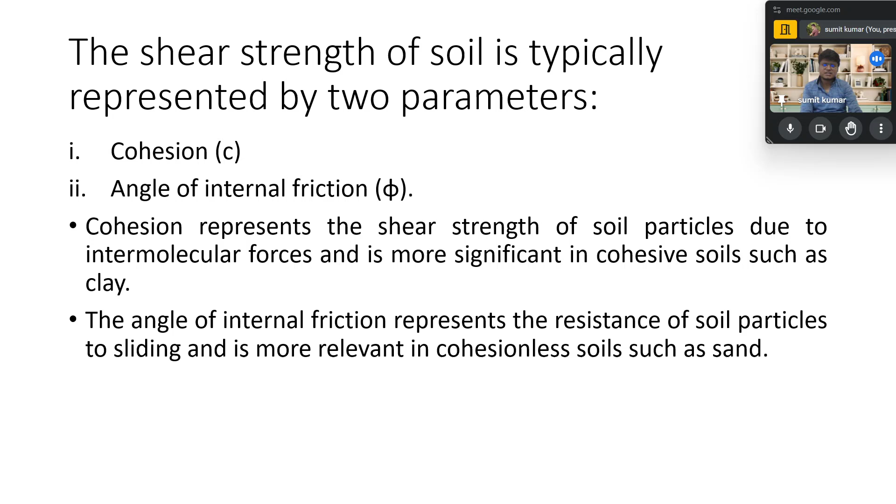First we understood the definition of shear strength, what it means to us. Afterward we learned about the factors that contribute to shear strength, that is cohesion and angle of internal friction. Then we learned about the types of tests: direct shear test and triaxial test. In the direct shear test, we studied the failure mechanism, and we understood the importance of shear strength in geotechnical engineering. In addition, we understood how shear strength is helpful for us in granular soil and cohesive soil, in one way or the other, and what we mean by that.

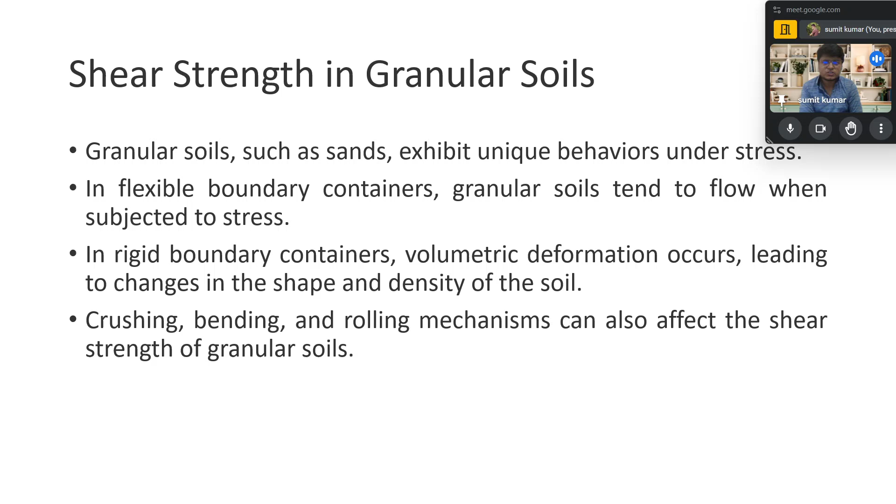That is how cohesion provides shear strength, and how the granules and the angle of internal friction help in contributing to strength, as understood in our last sessions. So these are the two slides. After that, we understood shear failures, in which we came to understand the state of stresses like sigma and tau.

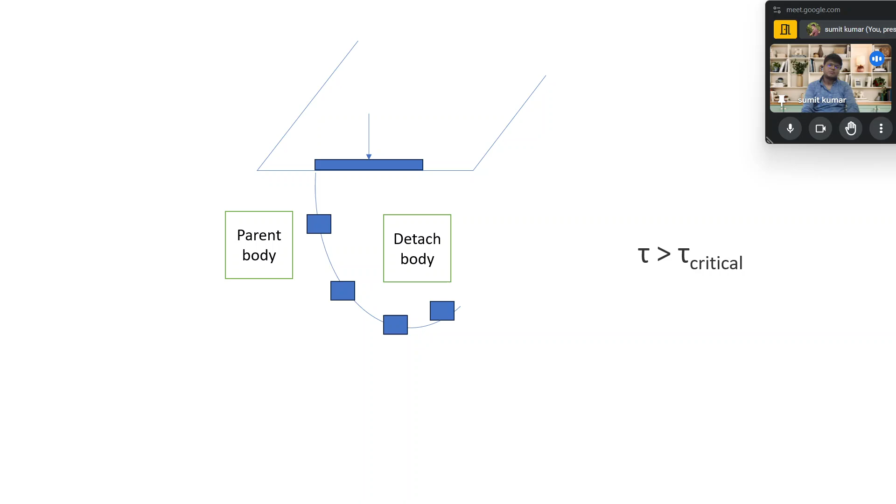Afterwards, we came to understand the parent body and detached body concepts, in which we also saw that after applying a certain amount of force or load, the failure planes get achieved, and the detached body, which was in concentration with the parent body, gets detached out. So the critical concept is also understood by us, and a physical example is also shown.

I am just taking a quick revision so that those concepts will be revised in your mind, what we have gone across during the previous classes. So from here when I put the new things, the revision will be there. This revision needs to be done by you as well before coming to class, but just as a small revision session, in 5 minutes I will try to show you all the slides so that those things will be revised in your mind. So we will go ahead.

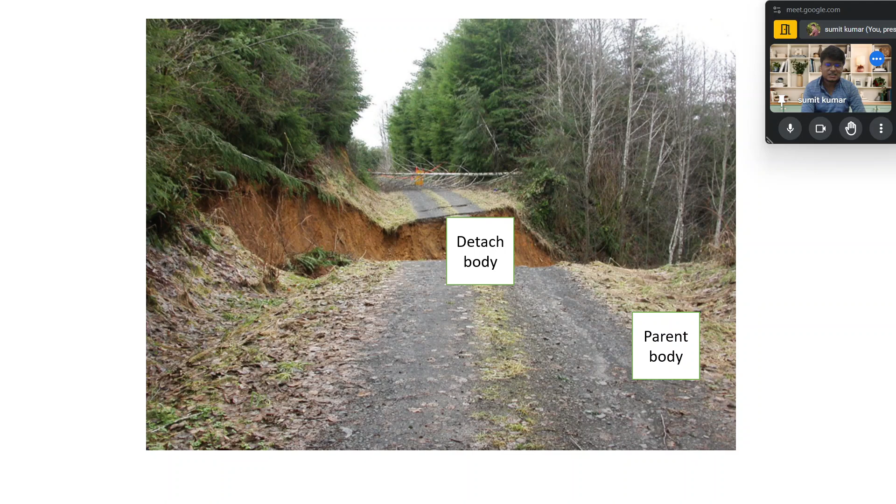So these things you have understood, the detached body and parent body concept, and how, if the strength of the critical failure surface is suppose 100 units, the load applied up to 99 units is totally acceptable, but when the load applied is 100 units, it is on the verge of failure, and when the load is 100.1 units, the surface flows out. So that concept we have discussed, and you must have understood those things.

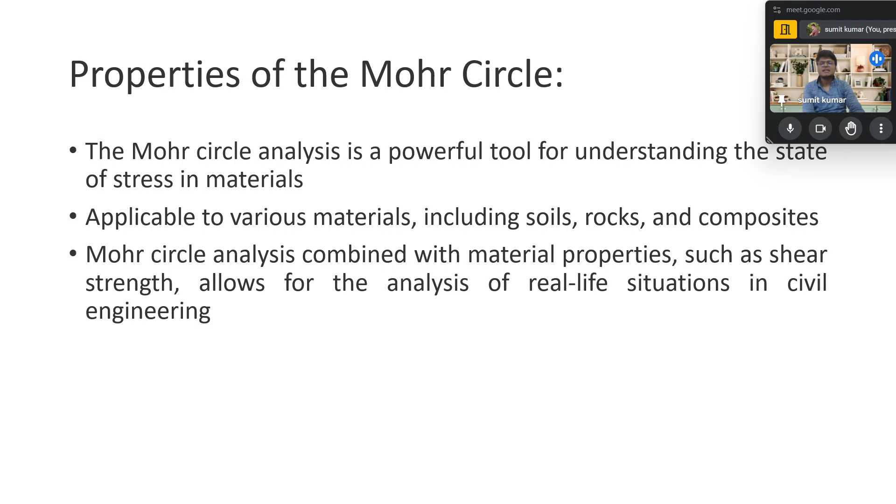We understand the biaxial state of stress. We understand that we are doing it in two dimensions, sigma x and sigma z, and how we found the shear stress and normal stress, the different normal axis and shear axis, and the principal shear stress and principal shear strain. In the Mohr circle, we found the properties of the Mohr circle, sign convention about the Mohr circle, and how we can find the origin, radius, and principal shear stress and principal shear strength.

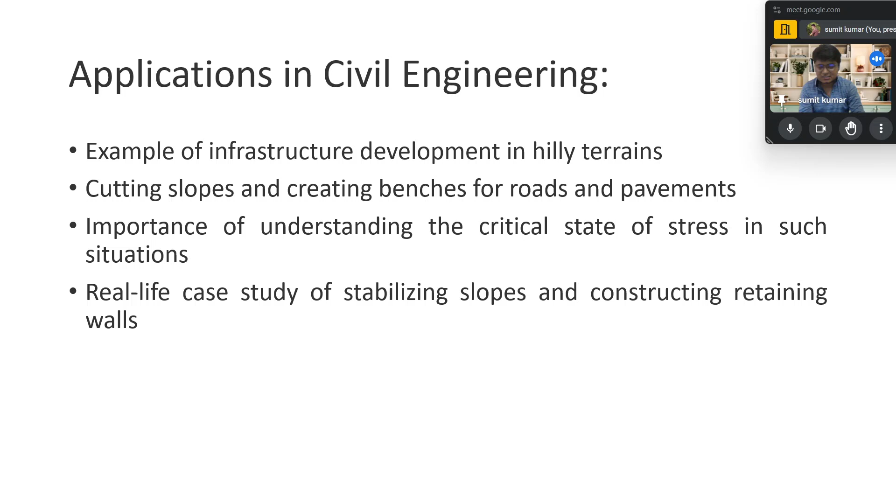We also saw some problems during the first class. After that, its application in civil engineering was covered during those sessions, and how it is practically implemented in the field. Apart from that, some more problems were taken up, and we were able to find that at a specific angle, what will be the maximum principal stress and maximum principal strain. So those things we have covered during our previous sessions.

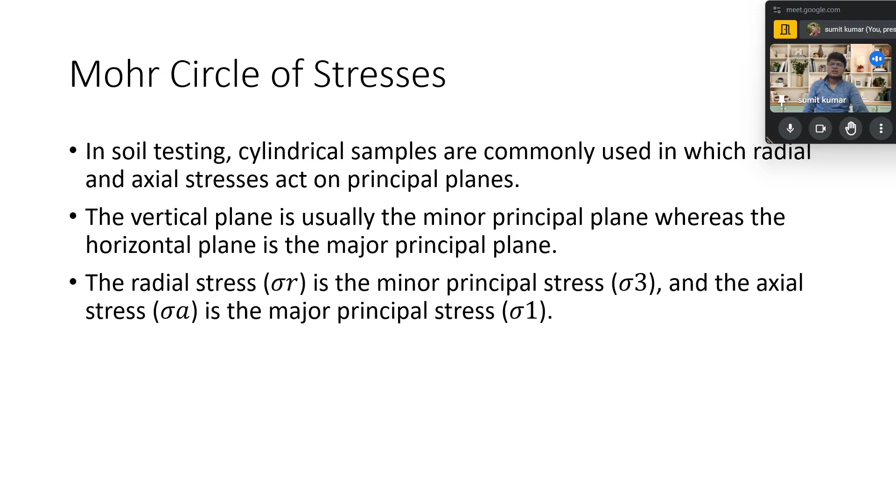Apart from that, we have understood the Mohr-Coulomb failure criteria. So from here we will move ahead and cover the new content from here, going one by one in today's session. Now I will start with the new things, because whatever I wanted to show you is already covered. Now we will start with the new content that will be more helpful for you.

So I will also take a pen. In today's class, first of all, we will start with exploring triaxial testing in geotechnical engineering. As seen earlier, we discussed the direct shear test, vane shear test, and triaxial test, but we will now go more in detail. We just said that there are three types of triaxial tests: UU test, CU test, CD test. We have come across those things, but we will now discuss in detail: unconsolidated undrained test, consolidated drained test, consolidated undrained test, that is UU/CU/CD.

So we will go ahead with that in today's session, and you will get a better understanding of the things. So first of all, we start with the definition again, because the basics should always be there before we move ahead. First of all, we talk about the definition. What does shear strength mean to us? We define shear strength as a material's response when subjected to shear motion.

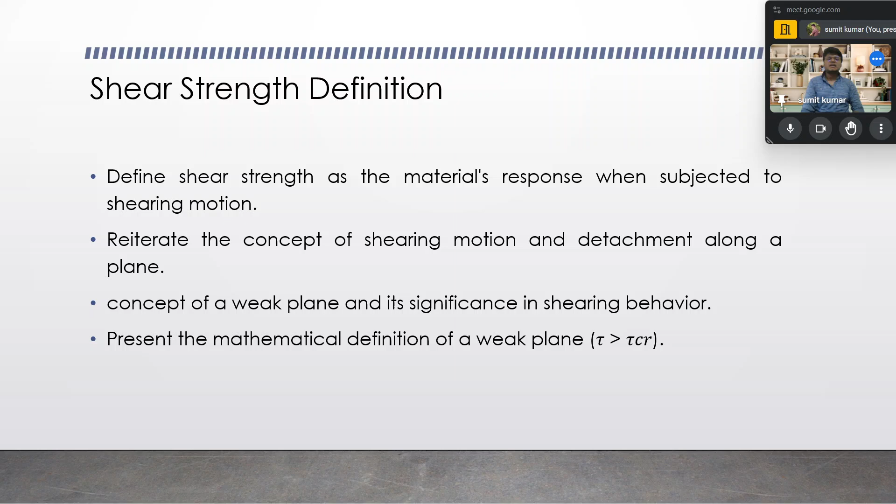So that problem is when we talk about the critical. Critical means that plane which is the weakest plane in our soil section. So from where the failure takes place, that section is the weakest plane, and the stress at which that failure takes place is the critical stress.

Okay, now we talk about the factors which influence the theory. One of the major factors is the earthquake. An earthquake can lead to relative motion between the soil particles. During seismic tremors, the soil particles come into movement with respect to one another, so motion takes place between the soil particles or the soil layers. If a stratified soil layer is there, a different type of movement could be there.

And in general, depending on the condition of water and soil type, if it is sandy soil, sometimes liquefaction can take place during the seismic tremor. So the readjustment and movement of soil particles between each other could lead to relative movement and to the failure of soil from that section.

Another is the fault. The fault can cause one portion of ground to slip down, leading to shearing. In soil sections there are several faults, and the movement could be up and down. If you have gone through a course in geotechnical earthquake engineering or soil dynamics, you will come across how the failure takes place, how subsidence takes place between the plates, and how the parts move over one another.

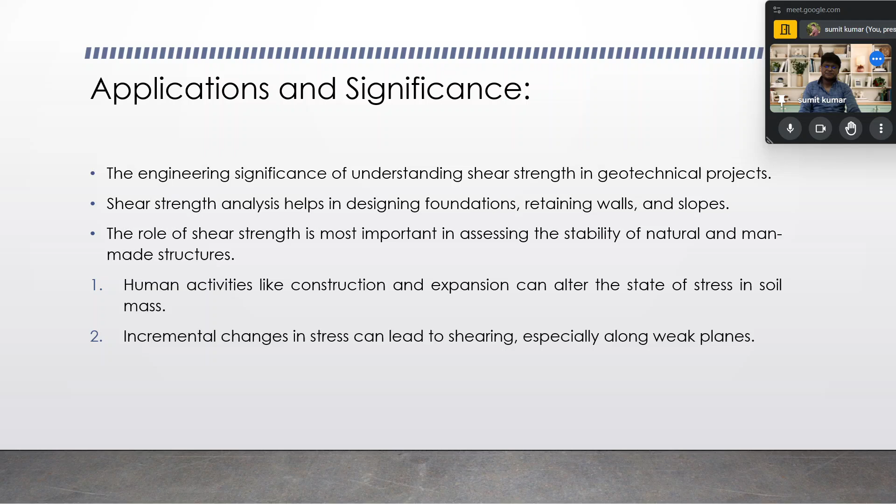Now, when we say that the incremental changes in stress can lead to shearing, especially along the weak planes, yes, obviously. During our last slides' discussion, we came across this fact and we said that this failure could be developed. Okay, now we talk about the Mohr-Coulomb failure criteria. What is the Mohr-Coulomb failure criteria?

When the soil has failed, the shear stress on the failure plane defines the shear strength of the soil. Thus, it is necessary to identify the failure plane, that is the plane on which the maximum shear stress acts, or the plane where the ratio of shear stress to normal stress is maximum, because by which we are able to find the critical plane of failure.

At present it can be assumed that the failure plane exists and it is possible to apply the principal stresses and measure them in the laboratory by conducting the triaxial test. Because as I have discussed earlier, in the triaxial test we are able to achieve the practical situation in the field, so that condition is justified.

Okay. Now, some more points in the Mohr-Coulomb failure criteria: the Mohr circle of stress at failure for the sample can be drawn using the known values of principal stress, and if the data from several tests carried out on different samples up to failure is available, a series of Mohr circles can be plotted. As we have seen, when we draw the series of Mohr circles and draw a common tangent, we find the failure envelope as well.

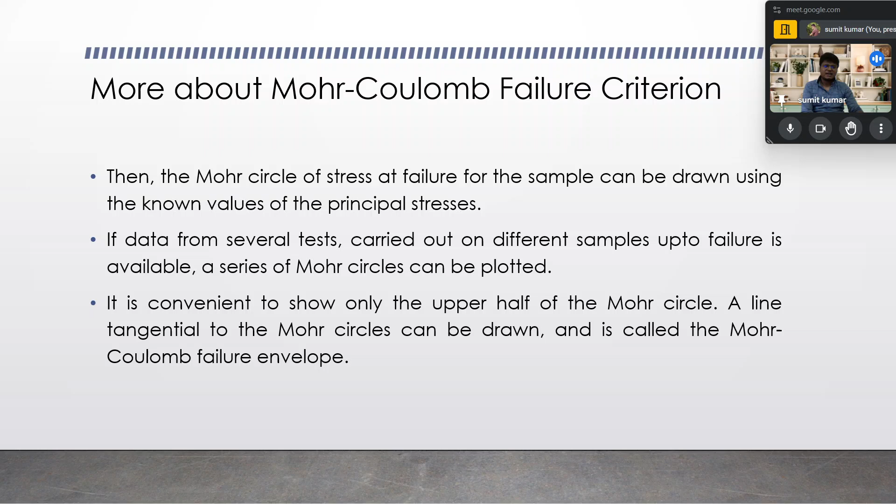Okay, so as we have discussed, we will draw the Mohr circle at different states of stress. First of all we keep changing sigma 3, and for that sigma 1 will be found. Then for the second Mohr circle, we change sigma 3, and the value of sigma 1 also gets altered. At the third stage, we again change sigma 3 and again get the value of sigma 1.

And one more point can be captured from here: the intercept on the y-axis, that is the tau axis, is the cohesion, and the angle with the horizontal axis, that is the sigma axis, is the angle of internal friction, which we are able to find by drawing the Mohr-Coulomb failure envelope. Okay, I think over here there will be no doubt.

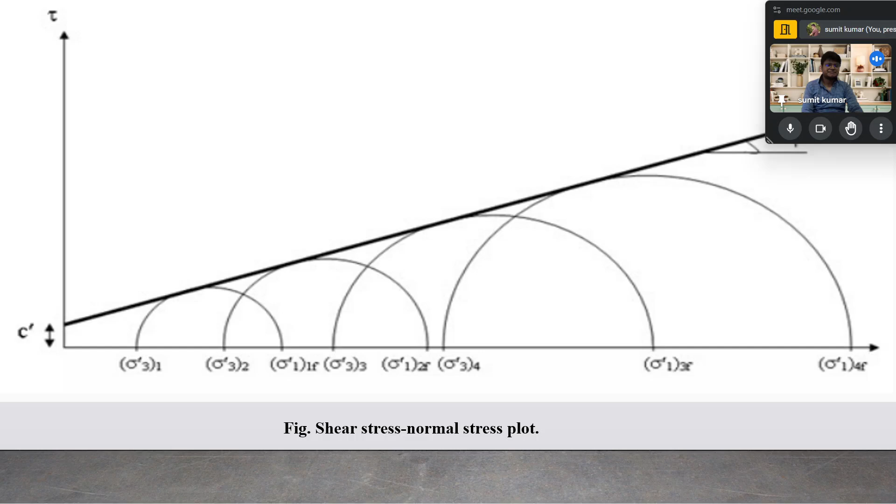Hello. Yes. Okay. So now we will talk about some more points in the Mohr-Coulomb failure criteria: if the stress condition of any other soil sample is represented by a Mohr circle that lies below the failure envelope, every plane within the sample experiences a shear stress which is smaller than the shear strength of the sample. Thus, the point of tangency of the envelope to the Mohr circle at failure gives a clue to the determination of the inclination of the failure plane.

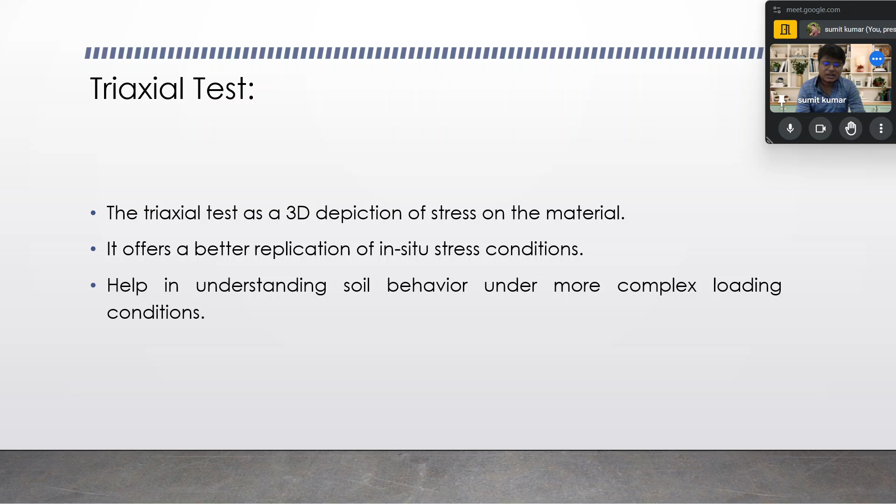And we will see in the triaxial test how these things are actually implemented. So when we talk about the triaxial test, we say it is a 3D replication of the stress of the material, as we have said many times. It replicates the practical 3D situation in the field to the laboratory. It offers better replication of in situ stress conditions and helps in understanding the soil behavior under more complex loading conditions. And how it takes place, we will see.

So, a triaxial test is carried out in a cell on a cylindrical soil sample having a length to diameter ratio of 2. What do we mean by that? Length is 2 times the diameter. The usual sizes are 76 mm by 38 mm. Here 76 mm is the length and 38 mm is the diameter, so the length is 2 times the diameter, and the other is 100 mm by 50 mm. It also satisfies the L by D equal to 2 criteria.

Okay, now three principal stresses are applied on the soil sample, out of which two are applied by the water pressure inside the confining cell and are equal. We have discussed this point as well, which is not written earlier, but I have stated many times. Suppose this is a cylindrical sample. You can see. On this cylindrical sample, when the state of stress is applied, it's applied from all directions equally.

So when the state of stress is applied equally, if you consider the x direction and z direction, in the x and z direction the stresses are applied through the water in the confining cell, that is the confining pressure, and that will be equal. And the stress in the normal direction is of a different value, that is said to be the deviator stress, which we will come across. Okay, not to worry.

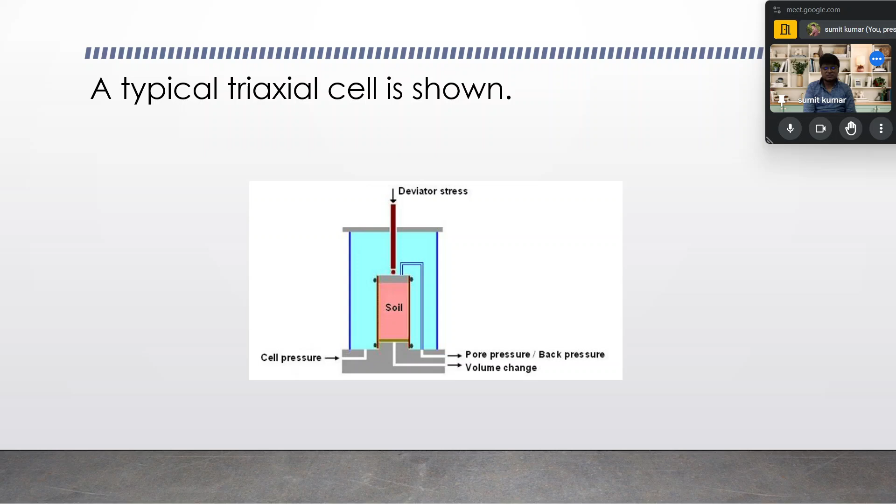Over here, you can see that the deviator stress is applied from the upper section, the water is filled in the cell, and that applies the confining stress, that is sigma 3. And you can see the cell pressure, pore water pressure, back pressure, the volume change, everything could be measured. So, how this test is performed and what results we come across, we will see. Okay, so first of all, the test procedure.

Okay, so give me a minute. I will take some water. Okay,

Okay, no problem. So we are talking about the test procedure. First of all, a soil sample is placed inside a rubber sheath which is sealed to a top cap and bottom pedestal by rubber O-rings. For tests with pore pressure measurement, porous discs are placed at the bottom and sometimes at the top of the specimen. And why these porous discs? We have discussed earlier as well. We will come across it.

A filter paper drain may be provided around the outside of the specimen in order to speed up the consolidation process, and the pore pressure generated inside the specimen during the test can be measured by means of a pressure transducer. So, triaxial testing is a fundamental and powerful technique in geotechnical engineering. Why fundamental and how powerful, we will see.

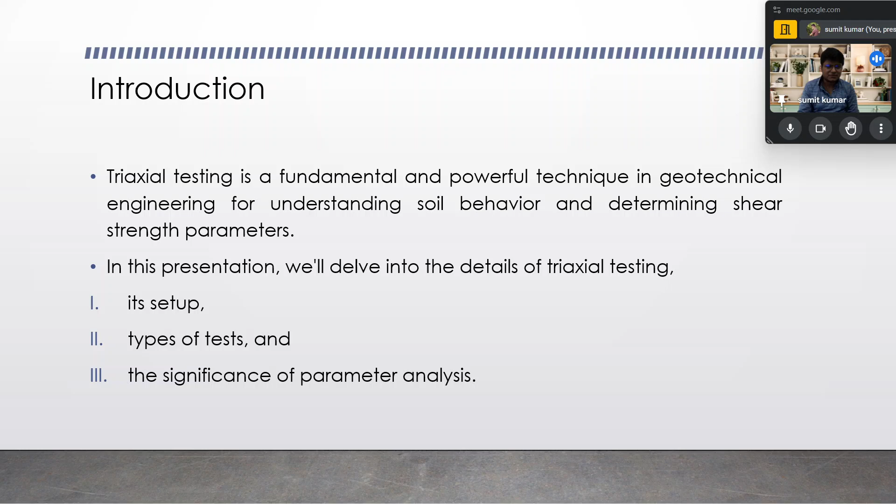It will help in understanding the soil behavior and determining the shear strength parameters. So during this presentation, we will see the details of triaxial testing, that is its setup, the types of test, that is the UU test, CU test, and CD test, the parameters we are able to obtain, that is c and phi, and how we develop the relation sigma 1 equals sigma 3 tan squared (45 plus phi by 2) plus 2c tan (45 plus phi by 2).

So here you can see that the triaxial compression test consists of two stages. The first stage is the consolidation stage. In this, a soil sample is set in a triaxial cell and a confining pressure is applied. In the second stage, the additional axial stress, also called the deviator stress, that is sigma 1 minus sigma 3, is applied, which induces shear stress in the sample. The axial stress is continuously increased until the sample fails.

You have seen the Coulomb failure curve, and you have also seen sigma 1 and sigma 3 plotted. So sigma 3 is applied, after that the deviator stress is applied in the upward direction until failure takes place. At failure, the value of sigma d is found, and sigma d is sigma 1 minus sigma 3, so we are able to find sigma 1, and on that basis we draw the Mohr circle. In the next setup we increase sigma 3 to sigma 3 2, and again apply the deviator stress.

In that case also we are able to find the deviator stress at which the soil fails, and we find sigma d2, where sigma 1 2 minus sigma 3 2 is sigma d2. So we are able to find sigma 1 2 and sigma 3 2. Again in the third case we repeat the same procedure, and we obtain three or four Mohr circles. Then we draw a common tangent and form the Mohr-Coulomb failure envelope.

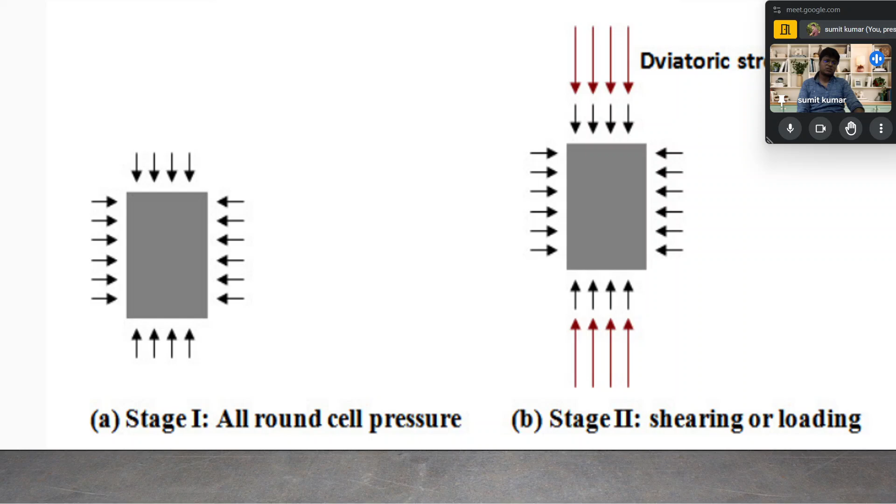Okay, now when we talk about understanding the triaxial test, the purpose is to evaluate the shear strength parameters of the soil sample. The purpose is only that, that we are able to evaluate the shear strength parameters. And what are the shear strength parameters? Shear strength parameters are the cohesion and angle of internal friction.

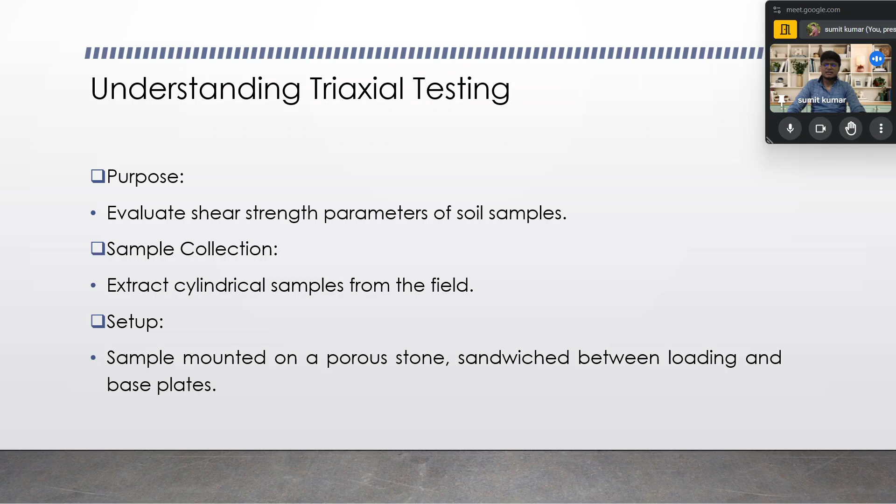Okay, so the sample collection. Extract cylindrical samples from the field will be collected, filled in the membrane and then kept in the setup which has been shown in the last slides. After that, in the setup, the sample is mounted on the porous stone, sandwiched between the loading and base plates, everything is placed and the test is performed.

Okay, now we see the types of triaxial test. First is the CD test, the consolidated drained test. Nothing is first or second; the different types of test we are discussing are named over here. Then there is the CU test, the consolidated undrained test. Then the UU test, the unconsolidated undrained test, said to be the fastest test. And afterward there is also the UCS test, the unconfined compression strength test.

Okay, now we will discuss the definition of each test one by one. First of all, starting with the UU test, the unconsolidated undrained test. In this, the cell pressure is applied without allowing drainage. That's clear from the name only, unconsolidated undrained. So the water is not allowed to flow out, and keeping the cell pressure constant, the deviator stress is applied.

First of all, the cell pressure is set up and all valves remain closed. After that, the cell pressure is applied, then the deviator stress is applied, and all the valves remain closed. That is, no water is allowed to flow out. The stress is increased until the soil fails, without the water flowing out, as all valves remain closed. So no drainage is allowed, and the volume also remains constant during the entire test.

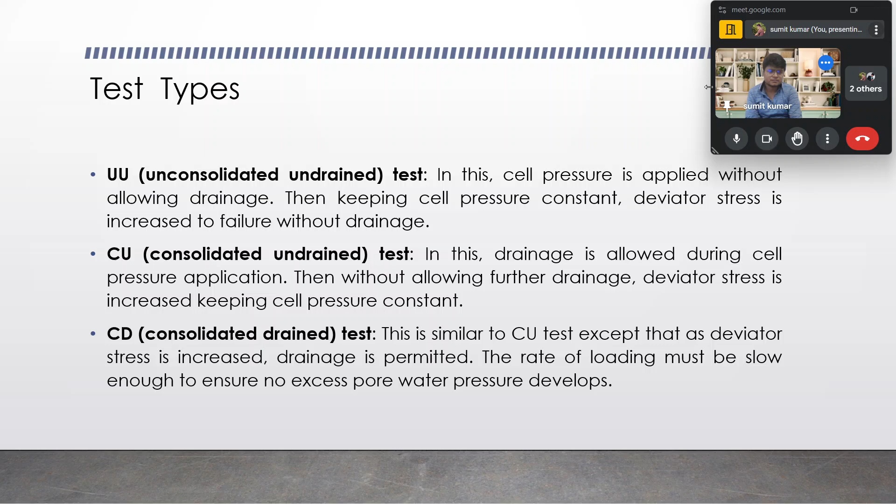Okay, so we will move ahead in the session. I think up to here you are enjoying the lecture, so after this small break we will move with the contents.

Before, we talked about three tests. So what are those tests? Those tests are UU test, CU test, and CD test.

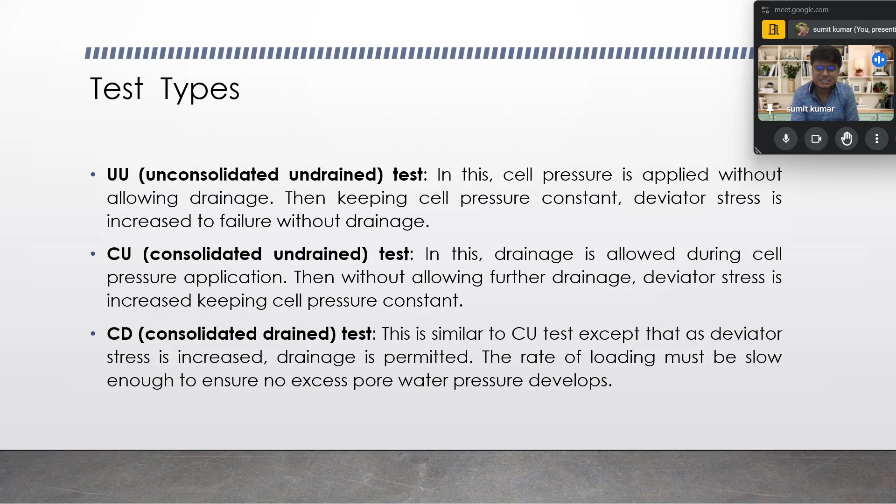Now we are talking about the pore water pressure, how the pore water pressure measurement takes place. Before going into detail, we will first talk about its importance and the measurement setup, and then move further in that direction.

When we first talk about pore water pressure measurement, there must be importance. The importance is obviously there because we have talked about this as a limitation of the direct shear test. So it helps in understanding the influence of pore water pressure and the valve used to apply the back pressure.

Or to measure the pore water pressure, we have seen in the triaxial setup which I have shown through the schematic diagram in some slide earlier, and it impacts the consolidated undrained and the

unconsolidated undrained test in one way or the other, that is CU test and UU test. The parameters analyzed are the shear strength parameters, that is cohesion and angle of internal friction. Triaxial test offers comprehensive insight into the soil behavior.

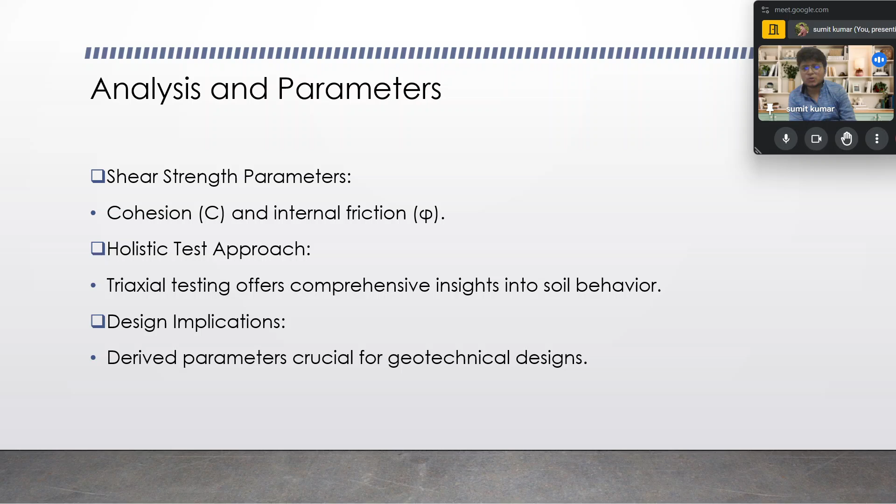And it provides a holistic view of the soil property under different conditions, and it is fundamental for accurate design and construction.

But it is a little bit lengthy process, time consuming, and sometimes it also needs special laboratory personnel to do so. That's why at some point people don't prefer this test and go with some other test instead. But this is one of the tests that gives the pure field conditions.

It replicates the field condition in one way or the other. Okay. Now we talk about significance.

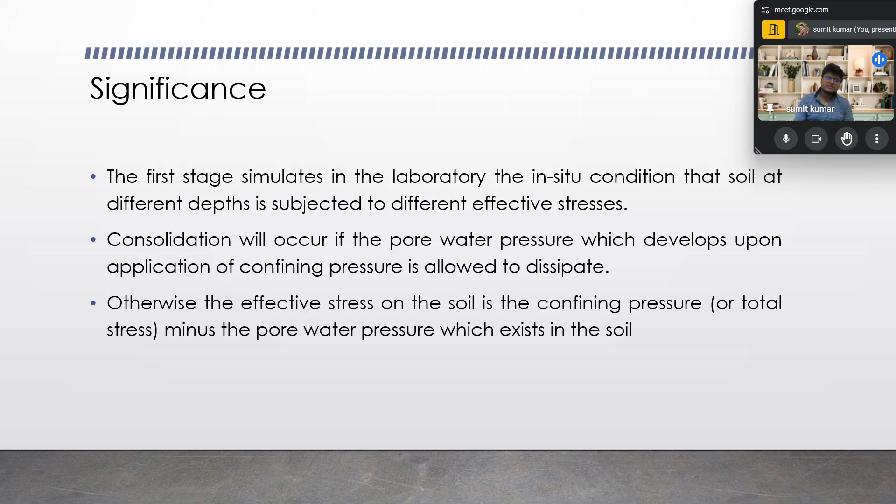The effective stress on the soil is the confining pressure or the total stress minus the pore water pressure which exists in the soil. This is common sense. We have discussed the total stress and effective stress earlier, in the second class, in detail. Here I will just say that total stress is the sum of the effective stress and the pore water pressure. So the effective stress is the total stress minus the pore water pressure.

During the shearing process, the soil sample experiences axial strain, and either volume change or development of pore water pressure occurs. The magnitude of shear stress acting on different planes in the soil sample is different, and at some strain, the sample fails. The limiting shear stress on the failure plane is called the shear strength. This point will be very clear in everyone's mind because I have discussed it again and again with the help of different examples.

Now, recapping the previous section, the triaxial test stands as a cornerstone in geotechnical engineering, offering profound insight into the shear strength parameters of the soil, that is c and phi. By performing different tests in the triaxial apparatus and incorporating pore water pressure measurement, engineers gain a comprehensive understanding of soil behavior. This understanding is crucial for making informed decisions in geotechnical design and construction projects.

The triaxial test remains a timeless and essential tool that continues to shape the field of geotechnical engineering. Obviously, because this test is irreplaceable, as it presents every condition of the soil section. By performing it, we are able to find the exact field condition. So this is irreplaceable, even after many years.

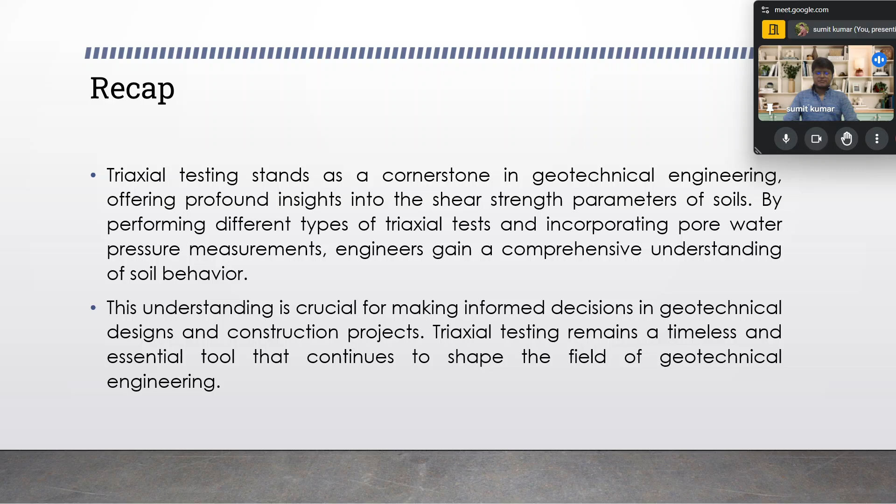So here we will close our discussion on triaxial test setup conditions and the different types of triaxial tests. Now we will see advanced insight into the triaxial testing technique and what we will cover as we move forward.

Starting with how triaxial testing has evolved significantly over time, transitioning from the traditional method involving a mercury column to the modern electronic system. You have seen the triaxial setup - the old setup was based on different conditions being discussed, and in the modern system, electronics came in with the help of computers. The results are replicated in real time. Basically, some dynamic tests could also be performed with these systems.

And in this presentation, the complexity of triaxial cell testing, including sample preparation, corrections, and drainage consideration, will be covered.

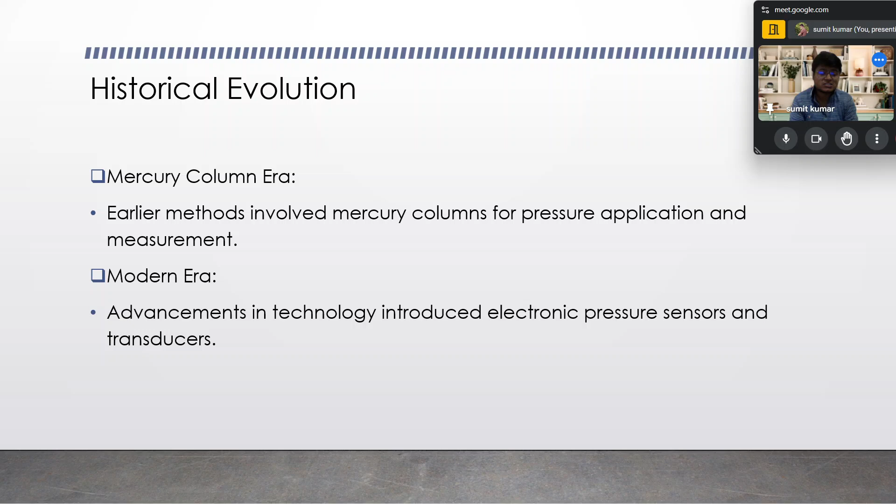When we talk about the evolution of this system, the earlier method involved a mercury column for pore pressure application and measurement. In modern times, technology introduced electronic pressure sensors and transducers for measuring pore water pressure. With this evolution, the triaxial cell test setup changed a little, and the calculation became more accurate. As sensors are used, the results are replicated in real time, so the value of stress or strength we obtain from this test is found to be 100% accurate.

When we talk about the porous stone, we've discussed the papers implemented there that ensure controlled drainage conditions, because the stones are also present on the upside and downside of our soil samples.

When we talk about the setup, it is a cylindrical soil sample extracted from the field. Typically, it has been seen to be 76 by 38 mm, and 100 mm by 50 mm, where 100 is the length and 50 is the diameter - so the length is twice the diameter in the sample.

When we talk about the setup components, there is the mounting on a porous stone enclosed by a rubber membrane. The soil is enclosed in the rubber membrane on which the confining pressure is applied through water. For the loading plates, axial stress is applied by the steel plate and the proving ring implemented at the top. The deformation measurement takes place with the help of the dial gauge which tracks volumetric deformation. Okay, so up to here I think everything will be clear.

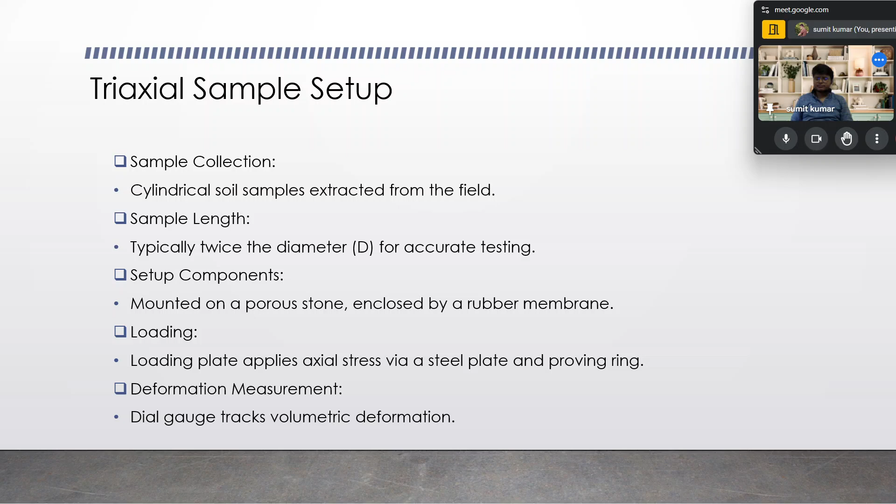When we talk about some correction factors like the rubber membrane correction: the rubber membrane is there in which the soil sample is created, so the rubber membrane effect on the soil strength and deformation is also there. For the shear strength correction, we correct for the higher axial strength due to the membrane, and compensate for the axial strain caused by the composite samples. When we talk about composite samples, the sample is implemented with the help of porous stones as well, so the axial strain may get affected due to that, so that correction will be there.

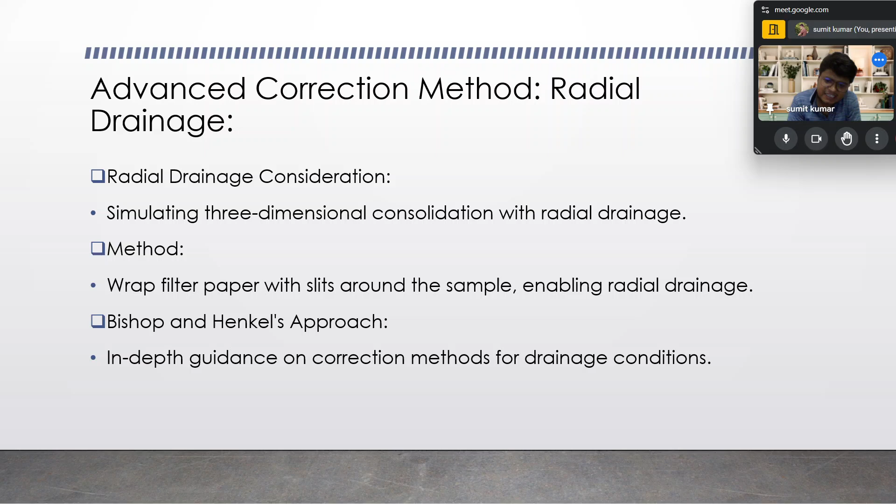Now, when we talk about the radial drainage system, that is the radial drainage consideration, simulating the three-dimensional consolidation with radial drainage. In this method, a filter paper with the slits is around the sample, enabling the radial drainage. And when we talk about the Bishop and Henkel approach, in their approach, the in-depth guidance on a correction method for drainage condition is implemented.

As we recap this section, the triaxial testing has transformed from the traditional mercury-based method to advanced electronic techniques. Rigorous correction factors, as we have seen for the axial as well as the radial, and for the membrane, everything is applied from the rubber membrane to the shear strength to the axial strength, and are crucial for accurate results. As I have said earlier, as we develop our technology and achieve advancement, we are able to achieve more accurate solutions and more real situations. So the strength parameters which we are able to find through the test are more accurate, along with the radial drainage simulation and its calculation. Further, this refines the testing process. So the comprehensive understanding of these ensures the higher quality of reliable triaxial testing outcomes.

Okay, now we are talking about the consolidated drained triaxial testing and some of its interests. Okay, so let's see what we are going to cover from here.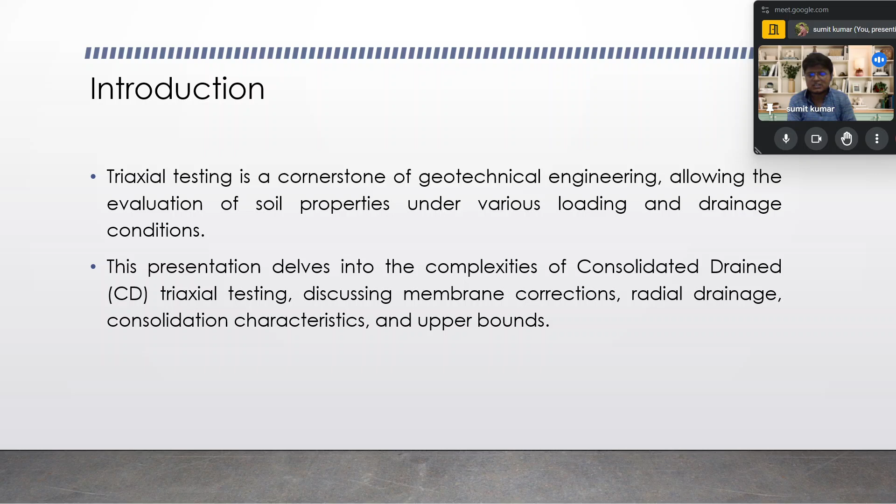As we are talking about the triaxial test, it is a comprehensive geotechnical engineering test allowing the evaluation of soil properties under various loading and drainage conditions. In this presentation, the complexity of the consolidated drained triaxial testing will be discussed, in which the membrane correction, radial drainage, and the consolidation characteristics and upper bounds will be discussed.

First of all, we discuss the membrane properties and corrections. The membrane elasticity affects the test outcome, obviously, as its elasticity also affects the test outcome because that will not be there in actual field conditions—the soils are adjacent by soil particles only, but not by any membrane or medium. So that must also affect it. And what are the processes for correction? We deduct the membrane effect from the shear strength and axial strength measurement, as the membrane introduces elasticity, influencing strain and shear strength.

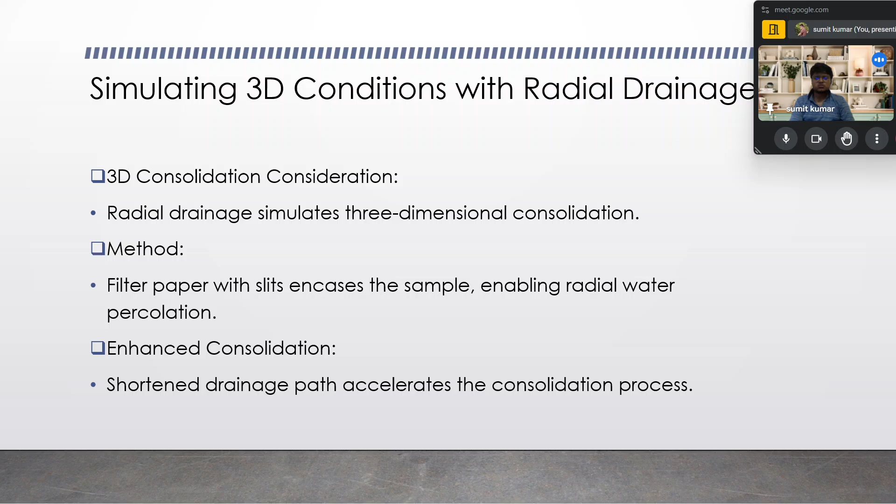When we simulate a 3D condition with radial drainage, we consider the 3D consolidation consideration—radial drainage simulates the three-dimensional consolidation. The method is that filter paper with the slits encases the sample, enabling radial water percolation. This shortens the drainage path and accelerates the consolidation process. So in this manner, the process takes place.

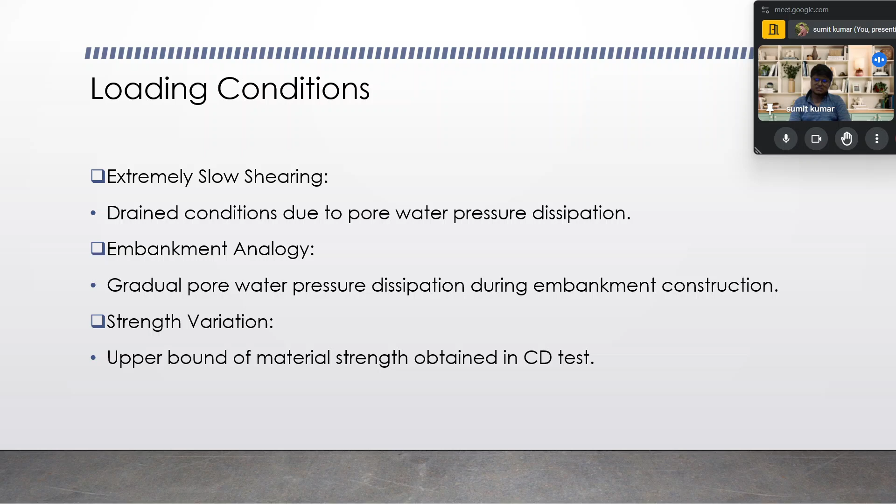Variation of strength: the upper bound of material strength is obtained in the CD test, as discussed in this section's first slide. In the geotechnical engineering perspective, seeking the upper and lower bound for the material strength and the ultimate strength, the CD test provides the upper bound on the material property. The practical significance is that it is critical in the limit equilibrium and plasticity theory studies.

When we recap this section, we come to know that consolidated drained triaxial testing provides valuable insight into the soil behavior, accounting for the membrane effects and the radial drainage, consolidation characteristics, and the strength bounds. Understanding these intricacies enhances geotechnical analysis and design, contributing to safer and more efficient engineering solutions.

Okay, the things are getting clear. Now we will move to exploring UU, CU, CD triaxial tests for geotechnical analysis. We'll go one by one with the help of the different test results.

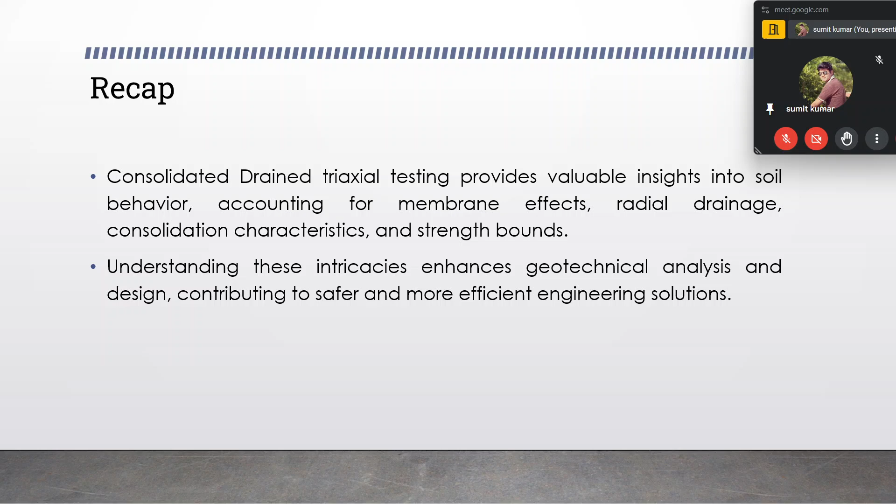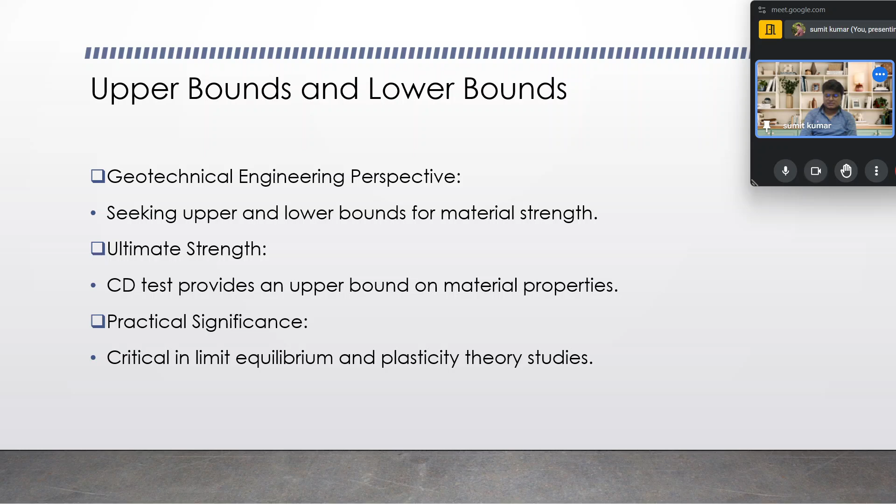Okay, give me a minute. Excuse me for a minute, I will come. Hello everyone. There is some problem over here due to which I had to take a small break. Yes, yes. Okay. Hello, yes, I am audible. Okay, no problem, I will move ahead from here. Let me check whether recording is going on or not. Yes, it's okay.

We were talking about the upper bound and lower bound, and I think we have moved across. Yes, we are exploring the UU, CU, CD triaxial tests for geotechnical engineering analysis. So we are over here now. First of all, we are talking about the UU test.

In the UU test, first of all sigma 3 is applied and the corresponding sigma 1 is found. Afterward, sigma 3 gets changed and the corresponding sigma 1 is also found. There is no drainage allowed in the first and second stage, so no volume change takes place. As I said earlier, the UU test most importantly replicates the clay condition, because there also the water is not allowed to flow out, since water flowing out takes lots of time. So this replicates that condition.

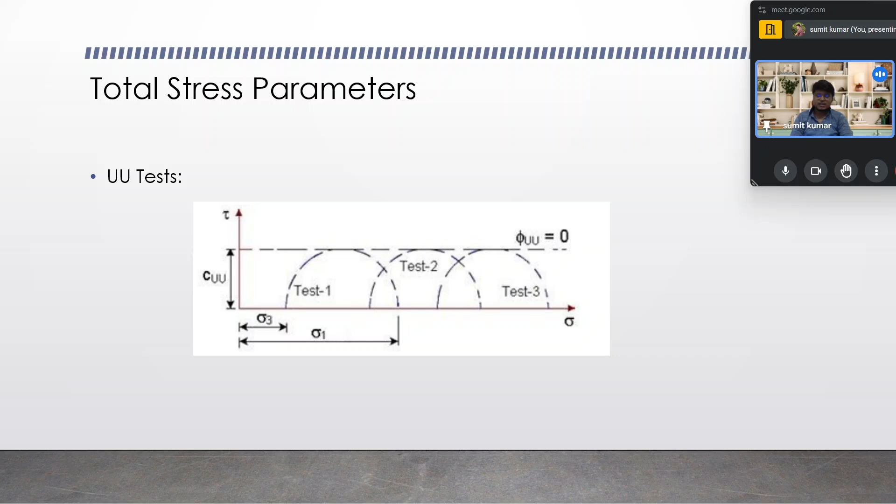Here all Mohr circles for the UU test, plotted in terms of total stress, not effective stress, have the same diameter, and the failure envelope is a horizontal straight line, hence phi UU is 0. It can be represented by the equation tau f equals C UU equals sigma 1 minus sigma 3 by 2.

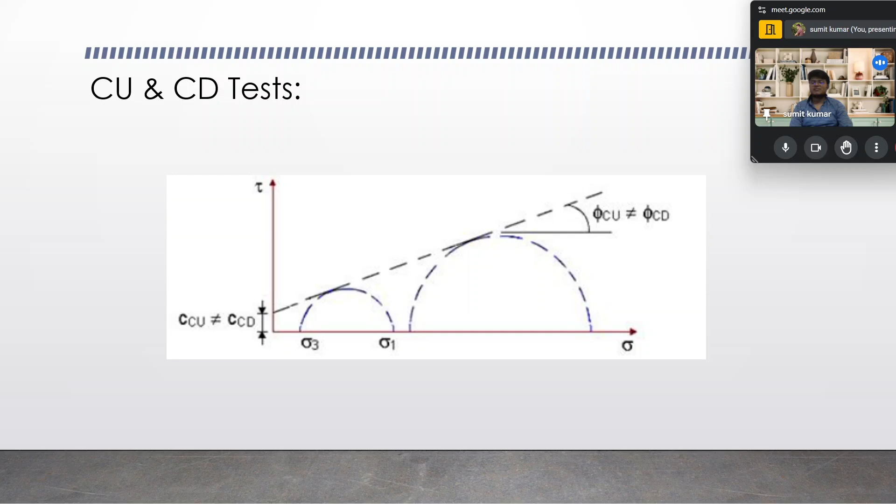Now for the CU and CD tests in the total stress condition, when we draw sigma 3, sigma 1 circles and draw a tangent, C CU and C CD are not found to be the same. Similarly, phi CU and phi CD are not the same. Why? Because of the drainage condition: in the UU test no drainage is allowed during both stages, but in the CU test, water is allowed to flow out in the first stage, and in the CD test, water is allowed to flow out in both stages. So the effective stress condition is found out.

So we will see that for tests involving drainage in the first stage, when the Mohr circles are plotted in terms of total stress, the diameter increases with the confining pressure.

Now, when the resulting failure envelope is an inclined line with the intercept on the vertical axis, it is also observed that the cohesion in the consolidated undrained test and the cohesion in the consolidated drained test are not found to be equal.

Why? Because in the consolidated drained test, water is allowed to flow out in both conditions, so the effective stress condition gets developed. But in the CU test, during the first stage, the water is allowed to flow out, but in the second stage, water is not allowed to flow out. So that condition doesn't replicate the CD test condition. That's why the angle of internal friction and the cohesion are not found to be the same during both stages.

It can be stated that for identical soil samples tested under the different drainage conditions of the UU, CU, and CD test, the failure envelope is not unique, but when we move ahead and do the effective stress parameter analysis, we are able to find that for all the tests the results replicate the similar condition. We will come across that and see over here.

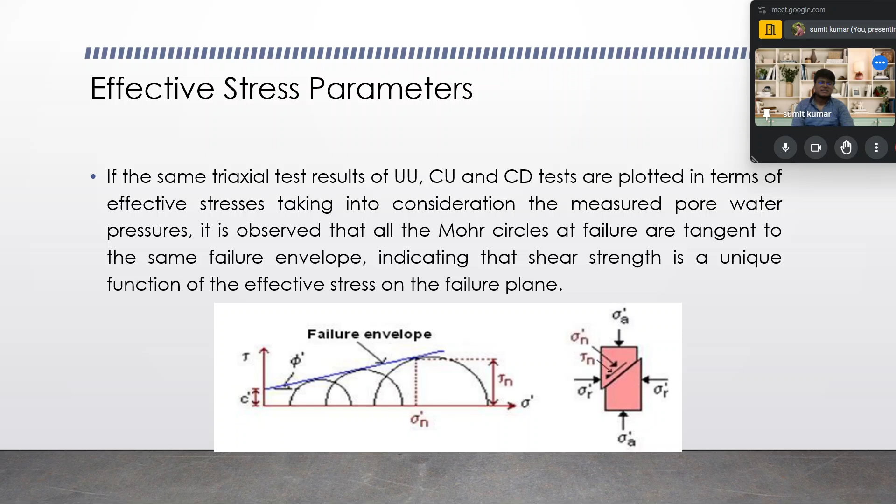And when we see the failure envelope, the shear strength envelope may then be written as tau equal to C dash plus sigma dash tan phi dash, where C dash is the cohesion intercept in terms of effective stress, and phi dash is the angle of shearing resistance in terms of effective stress. Sigma n dash is the effective stress acting on the rupture plane at failure. Tau n is the shear stress on the same plane and is therefore the shear strength.

We have come across this during our earlier session as well. So the understanding of these things will not be very difficult for any one of you, I think so. Yes.

See, we will move ahead and see our famous interrelation, which interrelates c, sigma 1 and sigma 3 as sigma 1 dash equal to sigma 3 dash into 1 plus sin phi by 1 minus sin phi, plus 2c root under 1 plus sin phi by 1 minus sin phi.

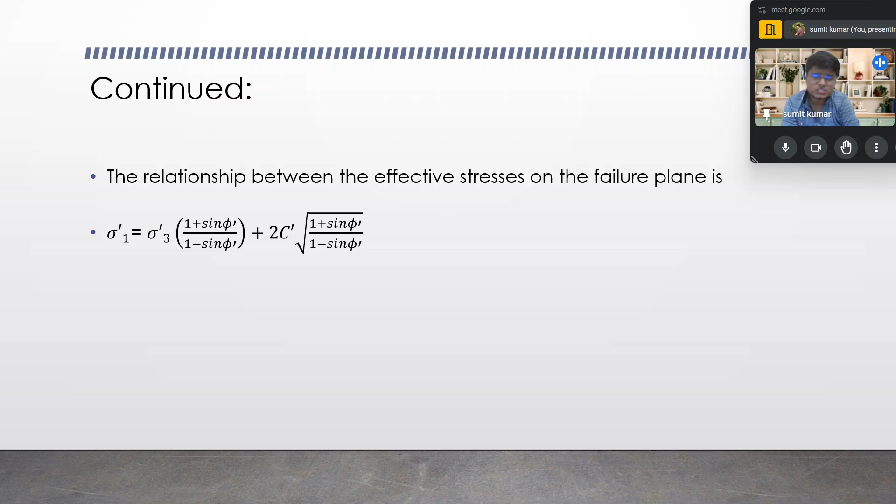This interrelation I have stated many times in a different fashion as sigma 1 dash equal to sigma 3 dash tan squared 45 plus phi dash by 2, plus 2c tan 45 plus phi by 2. So this is similar. When you do the trigonometric calculations, we are able to find that, and that's not any big thing. Okay.

Now, triaxial testing methods such as the consolidated drained and the consolidated undrained test offer valuable insight into the soil behavior under different loading and drainage conditions; we have come across that as well. So, during this presentation, we delivered the principal application and significance of these tests for assessing geotechnical stability. So, what are we talking about? We are talking about the effective stress analysis.

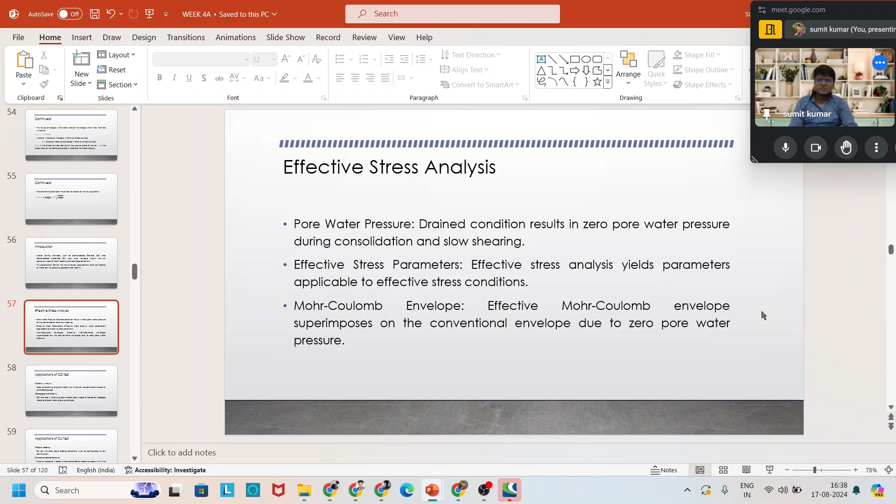So, in the effective stress analysis, pore water pressure measurement takes place, and when the drained condition is there, it results in zero pore water pressure during the consolidation and the slow shearing. The effective stress analysis yields parameters applicable to the effective stress condition.

When we talk about the Mohr Coulomb failure envelope, the effective Mohr Coulomb failure envelope superimposes on the conventional envelope due to the zero pore water pressure. Because when we talk about the zero pore water pressure condition, we are actually talking about the effective stress condition only. That's why the effective Mohr Coulomb failure envelope superimposes the conventional envelope due to the zero pore water pressure.

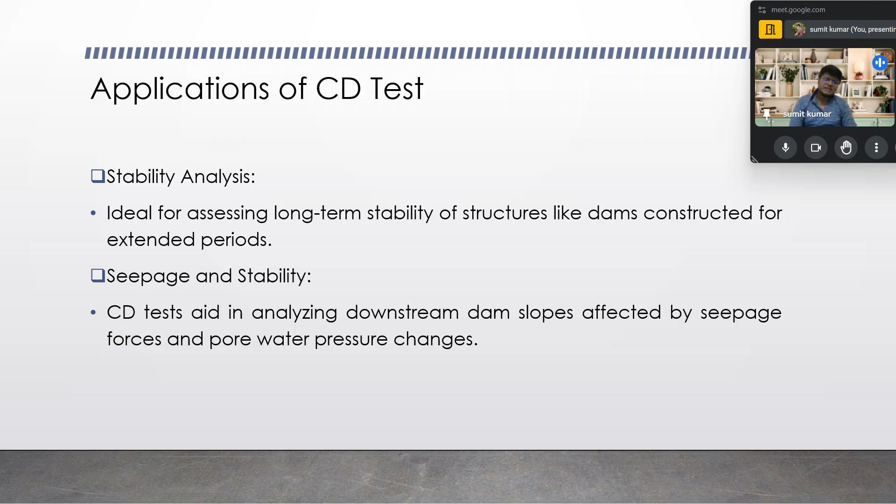So it is ideal for assessing the long-term stability of structures like dams constructed over an extended period. Similarly, for seepage and stability analysis, as in the CD test the drainage is allowed, the CD test aids in analyzing the downstream dam slopes affected by seepage forces and pore water pressure changes.

When we talk about the application of the CU test, the CU test simulates rapid loading conditions such as an earthquake or fast construction. And when we talk about its application in unconsolidated behavior, it is the study of the response in cases where consolidation does not occur within the material lifetime. So you see over here what two conditions get developed.

First, you can see in the CU test, in the first stage, water is allowed to drain out, and in the second stage water is not allowed to drain out, so it's very rapid loading conditions. It helps, like in an earthquake or a fast construction process. It's a replicated condition only. One case study is foundation construction: in a real world scenario, foundation construction in the context of rapid building erection, with initial consolidation due to self-weight, rapid construction minimizes the consolidation in one way or the other.

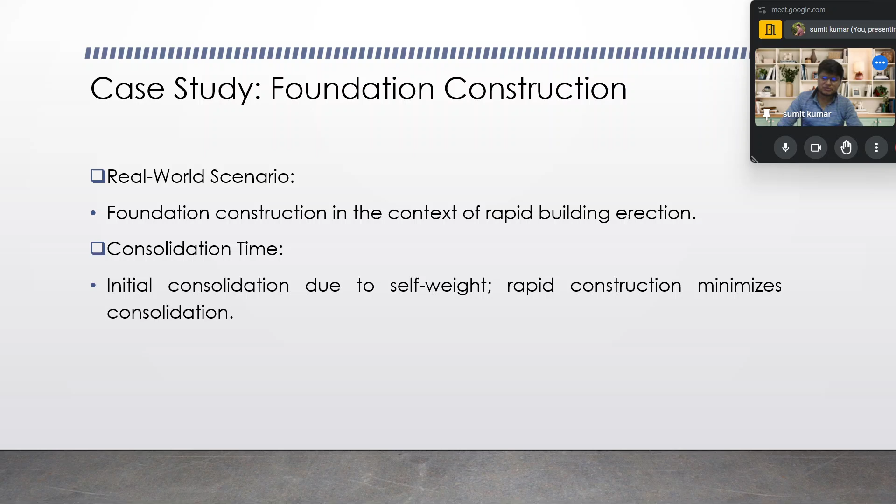When we recap this session, we say that the CD and CU triaxial tests offer powerful tools for understanding soil behavior under different loadings and drainage conditions. By providing insights into the effective stress parameters and addressing stability in various scenarios, these tests contribute to safer and more accurate geotechnical engineering practices, as we move ahead with developing an understanding of the CU and UU triaxial tests for geotechnical analysis.

We see that the triaxial testing methods, including the consolidated undrained and the unconsolidated undrained tests, offer valuable insight into soil behavior under different loading and drainage conditions. We have come across this many times, and during this presentation, the principal applications and significance of these tests are assessed for geotechnical stability.

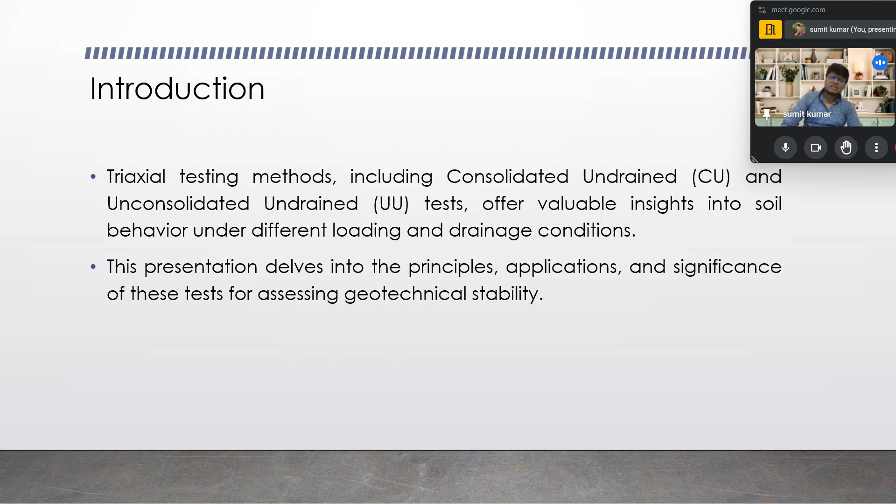As we see, shearing in the CU test. So what we are talking about, the CU test simulates the realistic condition. As we have seen or said many times, the triaxial test only replicates the real field condition. So over here, the statement says that the CU test simulates the real world scenario where consolidation has occurred, but rapid loading takes place.

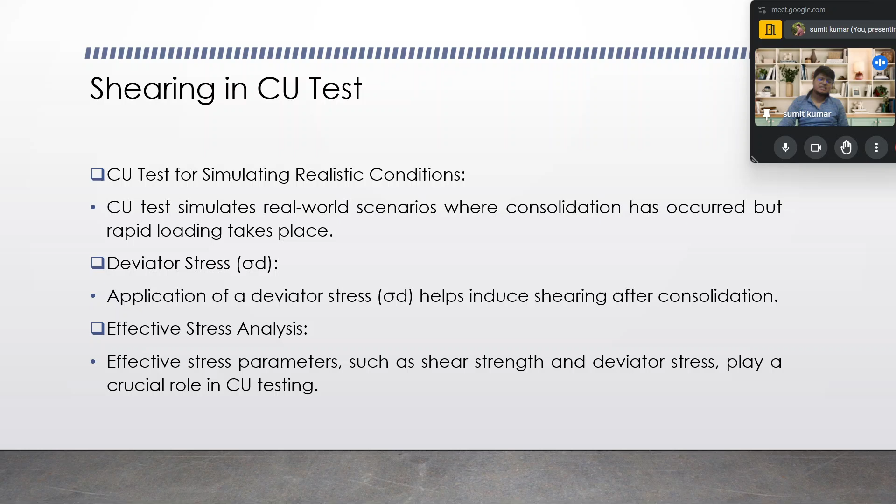And when we talk about the deviatoric stress, the application of the deviatoric stress induces shearing after consolidation. And in the effective stress analysis, effective stress parameters such as the shear strength and the deviator stress play a crucial role in CU testing.

When we talk about the significance of the A parameter, A and B are the Skempton's pore water pressure parameters, representing the efficiency of pore water pressure development for a given sigma d. And in relation to the pore water pressure, the pore water pressure, that is Ud, is determined by multiplying A with sigma d. In the effective stress calculation, the A parameter helps in calculating the effective stress components, that is sigma 1 dash and sigma 3 dash, during CU testing.

And the parameters obtained from the CU test are C_CU and phi_CU, where CU is the subscript in both. So the parameters acquired from the CU test represent the consolidated undrained cohesion and the angle of internal friction under the same testing conditions.

Okay, I think so. Everything, all the things are okay with everyone. Yes, I think so.

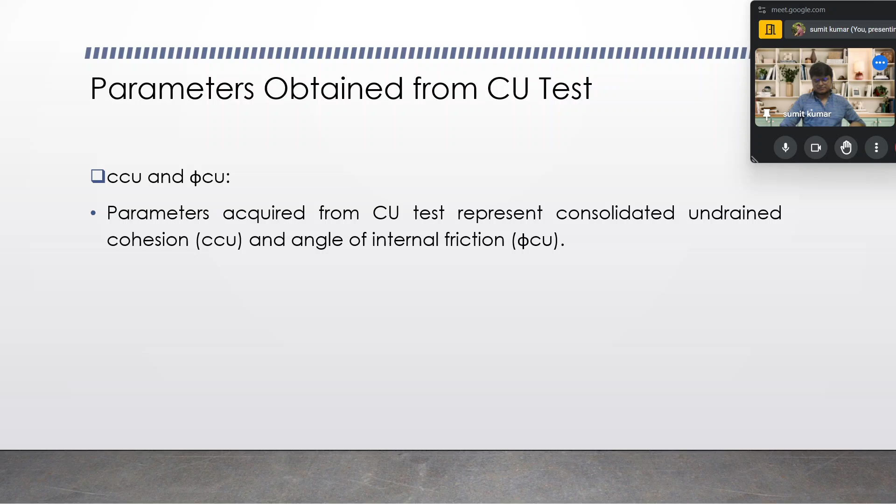So you see the effects on the Mohr circle. The Mohr circle shifts during the CU test; the Mohr circle shifts left due to the pore water pressure, reflecting the effective stress envelope. When we talk about the possibility of negative Ud, under certain conditions Ud might be negative, causing the Mohr circle to shift right.

When we talk about the pre-consolidation pressure, the pre-consolidation pressure represents the maximum past pressure experienced by the soil relative to its current state, that is, in prehistoric time what pressure it was loaded with and what pressure is applied today gives the pre-consolidation ratio or the pre-consolidation pressure.

So its role in geotechnical analysis: understanding the pre-consolidation pressure aids in assessing the soil strength and behavior, as if the soil was subjected to a large amount of load in the past, we can expect that up to that much load there will be no failure, since in prehistoric time it sustained that much load very easily. So if the pre-consolidation ratio is more than 1, that soil is considered to be good for construction in general.

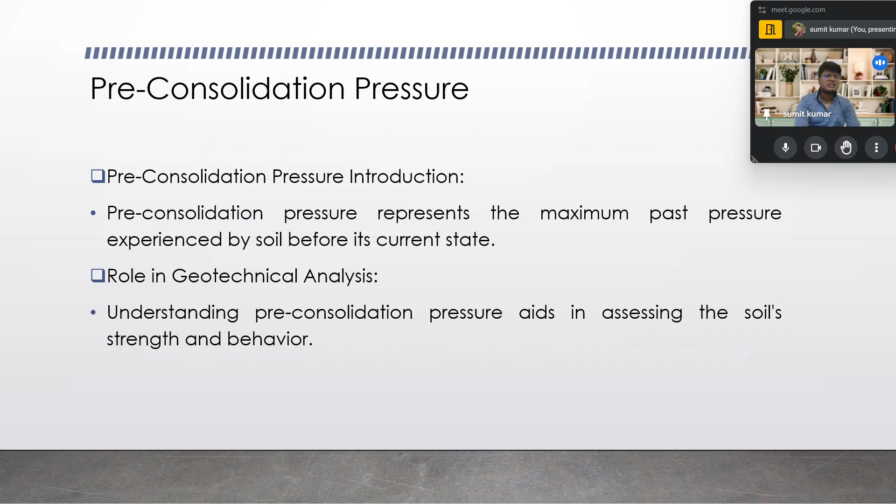Other soil aspects are also there, the strength is also calculated, but in general it is said it is good to go. So that's only a simple point.

Okay. Now, when we recap this section, we say that the CU and UU triaxial tests provide valuable insight into the soil behavior under different loading conditions. By studying the response to shearing and the pore water pressure, engineers can make informed, productive decisions about stability and design parameters, contributing to safer and more effective geotechnical practices.

When we move ahead, we talk about the pre-consolidation pressure and the shear strength behavior in geotechnical engineering. Over here, we see, okay, over here we see, excuse me,

yes. So over here we talk about the concept of pre-consolidation pressure and its impact on soil behavior. I have said some points earlier also, but over here we will see what is written in the presentation. It plays a vital role in understanding the shear strength variations. In this presentation, the significance of the pre-consolidation pressure and its relationship to the shear strength

is established. The definition and significance: pre-consolidation pressure is the maximum historical pressure the soil has experienced before its current state. As for the influence on soil behavior, pre-consolidation pressure affects how soil responds to loading and unloading, leading to various pore water pressures.

Because when we talk about the pre-consolidation ratio or pressure, it is applied in the past relative to the present. If we look at the last line of the presentation, the pre-consolidation pressure affects how soil responds to loading and unloading. Because unloading takes place, the stress applied in the past is more than what is applied now.

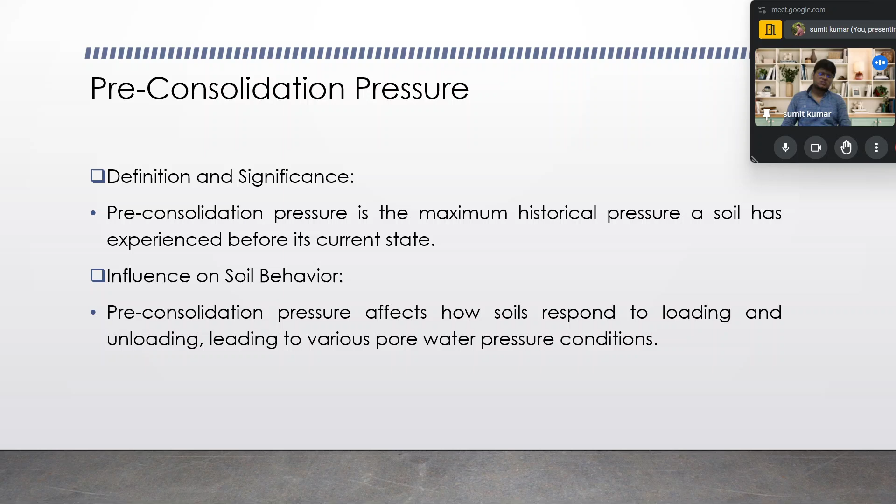Okay, when we talk about the variation in the pore water pressure: positive pore water pressure, soil with pre-consolidation pressure less than the current stress exhibits positive pore water pressure. Negative pore water pressure, when the current stress is less than the pre-consolidation pressure, the soil exhibits negative pore water pressure.

Yeah, sure. I think that will be very clear when we go across the basic geotechnical engineering course, as we are in geotechnical engineering two. So we are talking here about the advanced aspects, the implementation and application of what we have read in basic soil mechanics, or geotechnical engineering one.

Okay, the pre-consolidation pressure classification: normally consolidated, NC, soil with positive pore water pressure due to pre-consolidation exhibits frictional behavior, that is phi not equal to 0, C equal to 0. And over-consolidated soil with negative pore pressure due to pre-consolidation exhibits cohesive behavior, that is C is not equal to 0 and phi is equal to 0, because with cohesive behavior the angle of internal friction is 0.

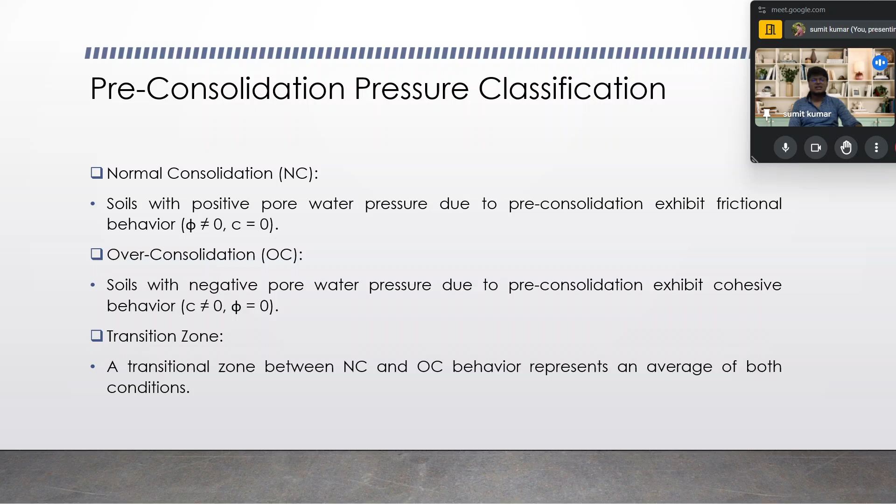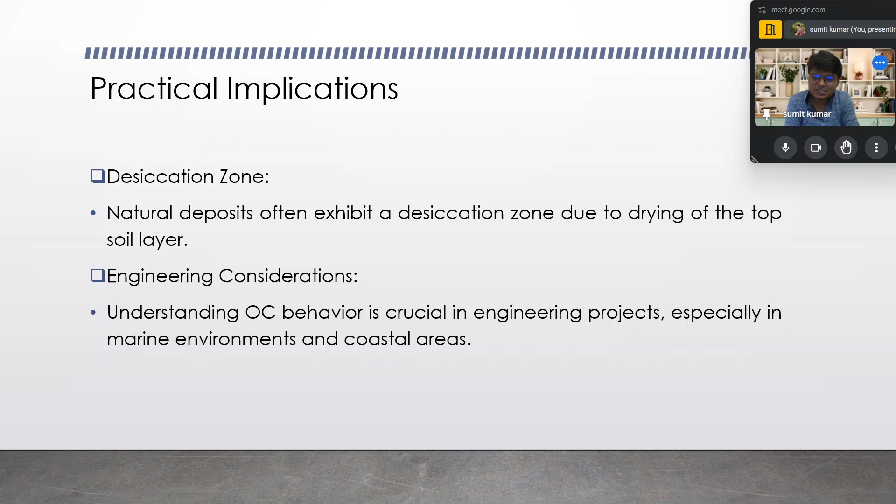When we talk about engineering considerations, understanding OC behavior is crucial in engineering projects, especially in the marine environment and coastal areas. When we sum up this section, we say that the pre-consolidation pressure plays a pivotal role in determining the soil behavior and the shear strength variation. Recognizing the influence of the pre-consolidation pressure helps engineers make informed decisions regarding design, stability and construction in various geotechnical scenarios.

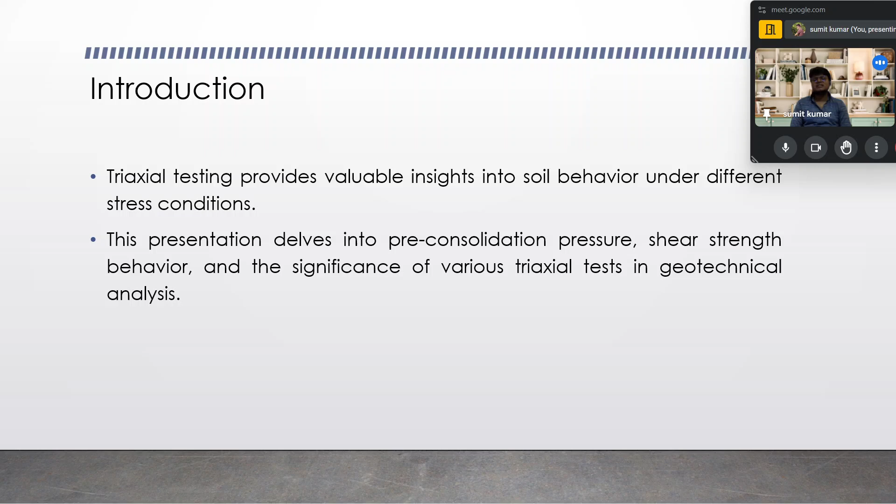So during triaxial testing, sigma 3 is applied, sigma d is applied in the axial direction, and on the basis of that we are able to find sigma 1. When we plot sigma 3 and sigma 1 as Mohr circles by varying sigma 3, a common tangent drawn to all the Mohr circles results in the development of the Mohr-Coulomb failure envelope. Okay, no problem.

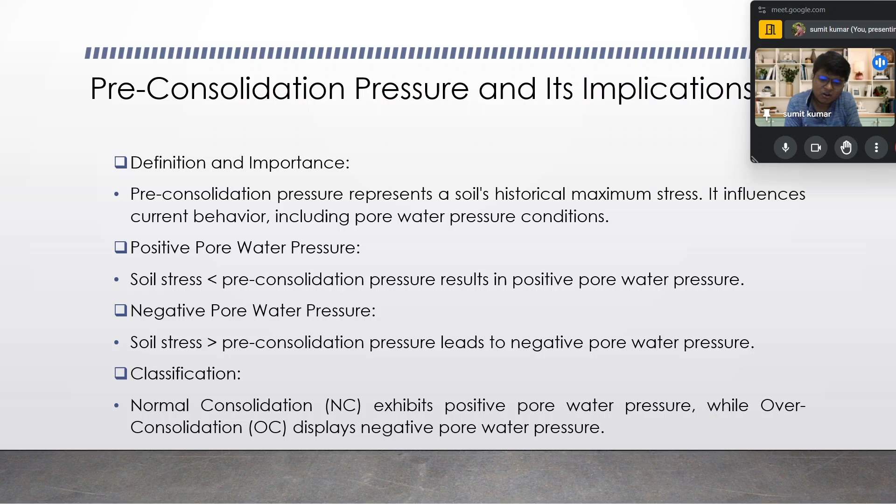Now we talk about the pre-consolidation pressure and its implications, starting with the definition and its importance. The pre-consolidation pressure represents the soil's historical maximum stress. It influences current behavior including the pore water pressure condition. For positive pore water pressure, the soil stress is less than the pre-consolidation pressure. For negative pore water pressure, the soil stress is more than the pre-consolidation pressure. Normally consolidated soil exhibits positive pore water pressure while overconsolidated soil displays negative pore water pressure.

Now we talk about the unconsolidated undrained test. The purpose of the UU test is to analyze the unconsolidated undrained behavior, suitable for saturated young offshore materials, as it is one of the fastest tests and the process takes place very quickly. In terms of undrained total stress, the UU test focuses on the total stress parameters, phi u equal to 0 and cu equal to 0, and the shear strength envelope forms a horizontal line on the tau-sigma plane due to phi u equal to 0.

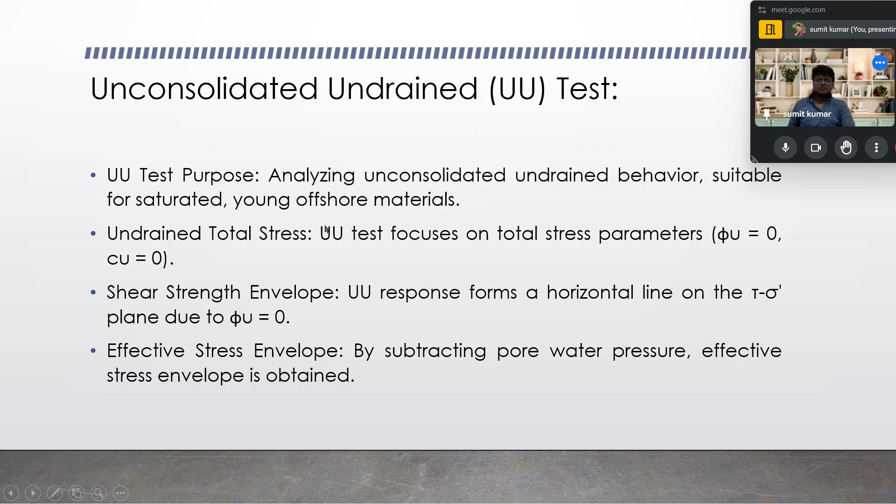When we talk about the UCS test and the triaxial testing, in the unconfined compressive strength test, it reveals negative pore water pressure due to lack of confinement.

When we talk about comprehensive analysis, the triaxial testing strategies of CD, CU, and UU provide a complete understanding of soil behavior, interpolation, and extrapolation. When we interpolate, CD, CU, and UU test results help us in establishing a range of soil parameters for practical use.

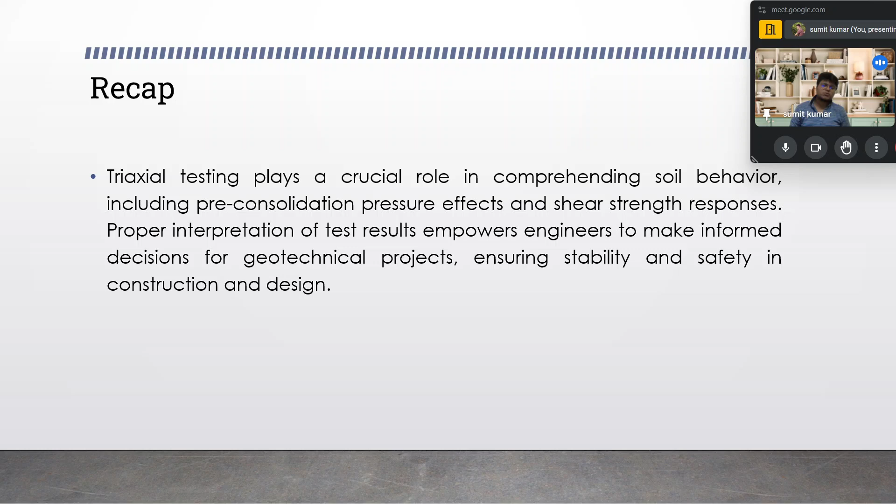As we recap this section, triaxial testing plays a crucial role in comprehending soil behavior, including pre-consolidation pressure effects and shear strength responses. Proper interpretation of test results empowers engineers to make informed decisions for geotechnical projects, ensuring stability and safety in construction and design.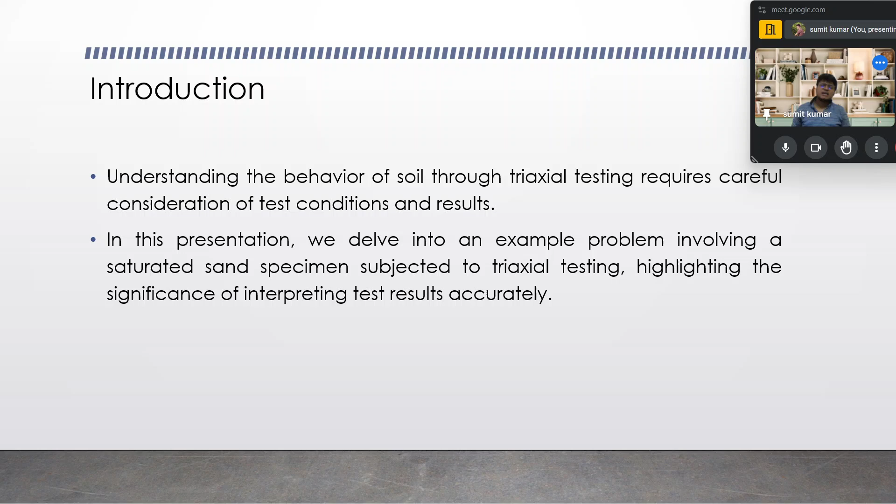In this presentation, we discuss an example problem involving a saturated sand specimen subjected to triaxial testing, highlighting the significance of interpreting test results. In the initial test setup and consolidation, the saturated sand specimen has dimensions of 75 mm length and 37.5 mm diameter. At the initial consolidation stage, the specimen is consolidated under 75 kilonewton per meter square cell pressure.

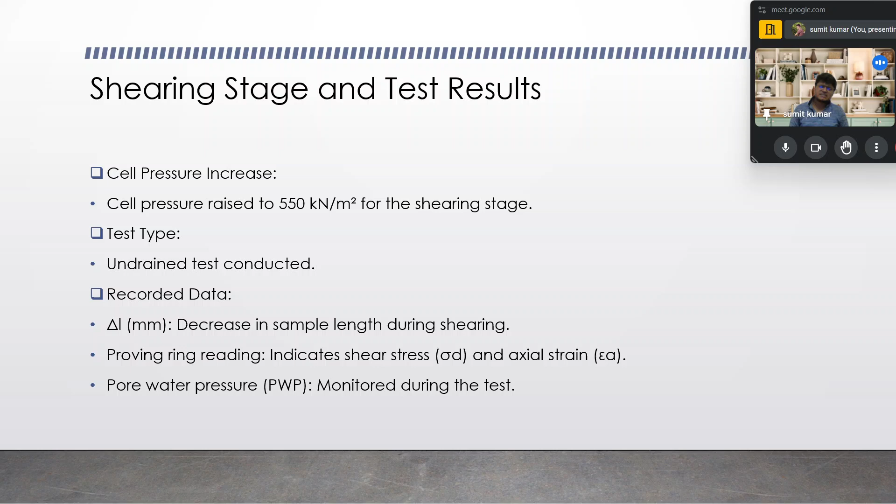In the shearing stage, the cell pressure is raised to 550 kilonewton per meter square. For the undrained test conducted, delta L in mm represents the decrease in sample length during shearing. The proving ring reading indicates the shear stress sigma D and the axial strain epsilon A. The pore water pressure is monitored during the test.

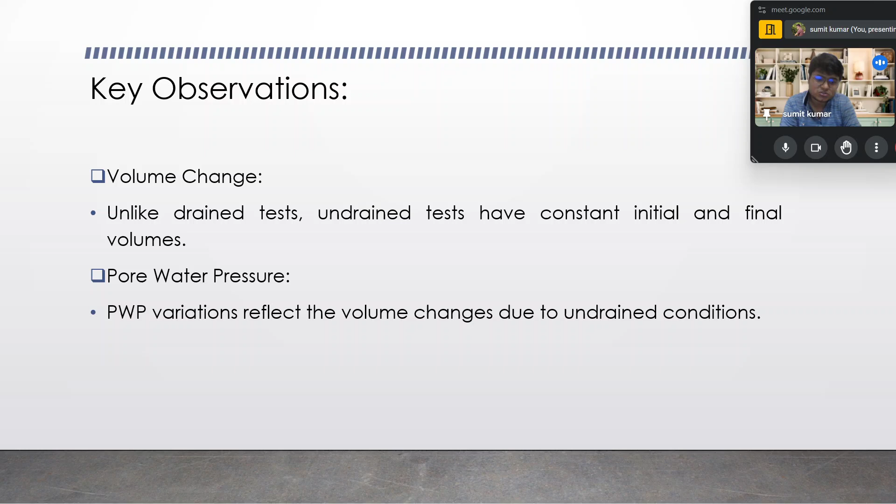When the pore water pressure measurement takes place, A1 equals Li divided by Li minus delta L into A. And if we divide the above and below by length, we find A1 equals A divided by 1 minus epsilon A. As discussed earlier, you can correlate with this condition.

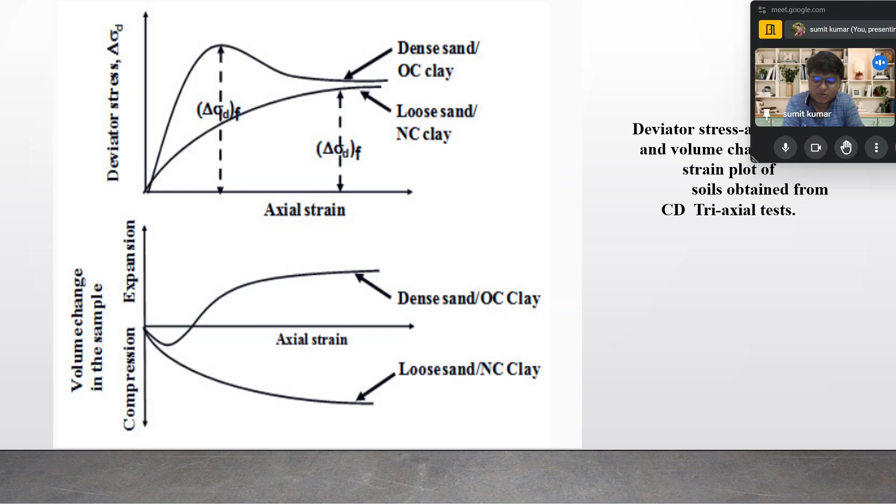Over there, you can see sigma df for the loose sand NC clay and for the dense sand OC clay, and similarly for the change in volume, as discussed earlier. With this, we recap this section: interpreting the triaxial test result demands meticulous attention to detail. By recognizing clues like volume equivalence and pore water pressure variations, engineers can accurately diagnose soil behavior, addressing inconsistencies and making informed design decisions. The example underscores the critical connection between test conditions, results, and real world application in geotechnical engineering.

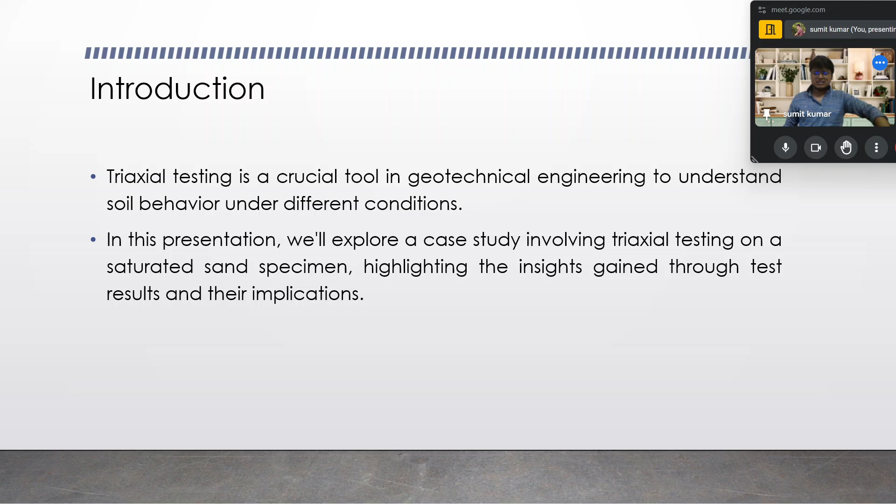As we move ahead, we see triaxial testing, understanding material behavior and interpretation. Triaxial testing is a crucial tool in geotechnical engineering to understand soil behavior under different conditions. In this presentation, a case study involving triaxial testing on a saturated sand specimen highlights the insights gained through the test results and their implications.

Looking at shearing and pore water pressure: the decreasing pore water pressure is a notable observation. The pore water pressure decreases as shearing progresses, implicating the undrained test. This is unexpected behavior, since in the undrained test usually pore water pressure rises. When we talk about material behavior, we recognize the significance of this decreasing pore water pressure.

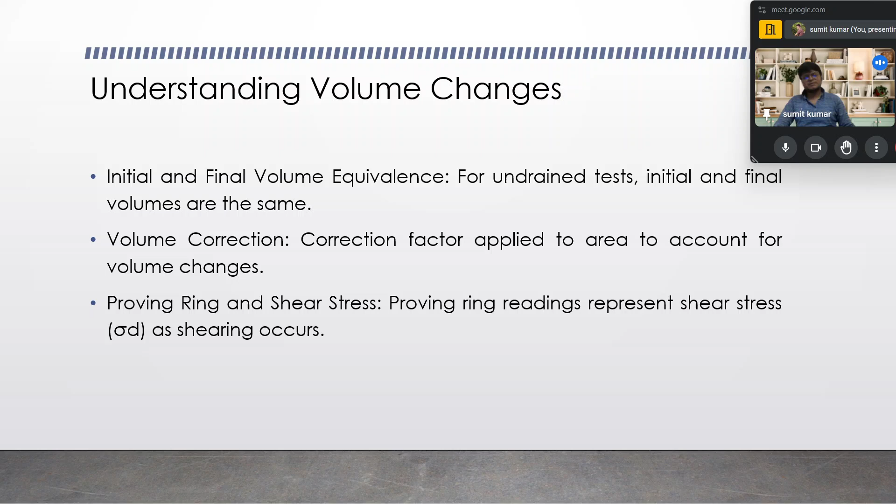When we talk about volume change, the initial and final volume equivalence for the undrained test shows the initial and final volume are the same. A volume correction factor is applied to the area to account for volume changes. For the proving ring shear stress correction, the proving ring reading represents the shear stress sigma d as the shearing occurs.

When we talk about the Mohr circle failure, plotting the result determines the peak failure point achieved. Ensuring the completeness of the test through Mohr circle visualization helps in developing a better understanding of the test results. As we see in the interpretation, this is complex geotechnical analysis.

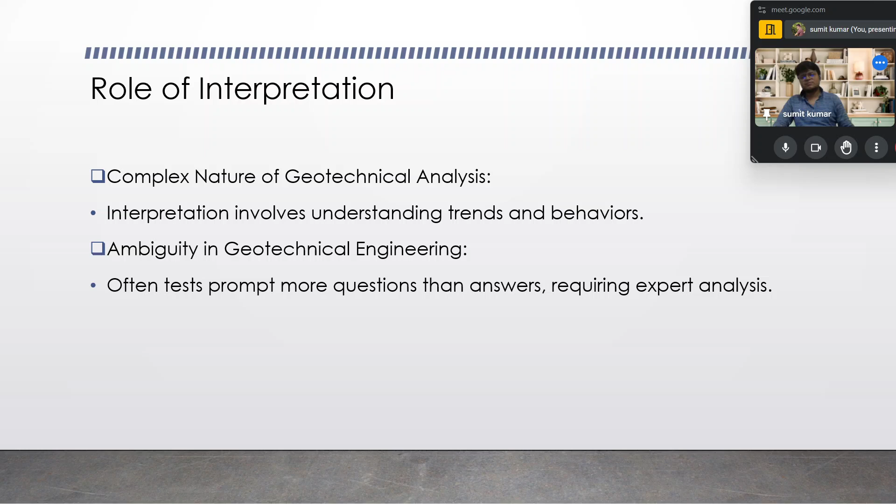Interpretation involves understanding the trends and behavior. Often the tests raise more questions than answers, requiring expert analysis. When we recap this section, triaxial testing unveils vital insight into soil behavior, but effective interpretation means describing the test result within the context of material properties and test conditions, which is essential for accurate geotechnical analysis.

So over here, the case study demonstrated the interplay between test conditions, results, and real world interpretation in geotechnical engineering.

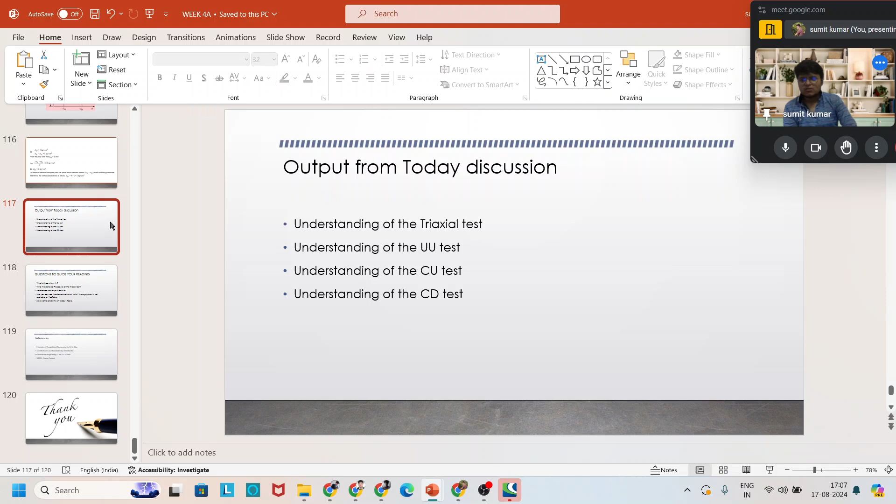So with this, I will sum up today's session. The rest will be discussed during the next lecture. What are the outcomes from today's lecture? We understood the UU test, CU test, and CD test, how the Mohr circle gets formed, and how the Mohr Coulomb failure envelope gets developed — each understood by one and all in a very good manner with today's thoughtful discussion.